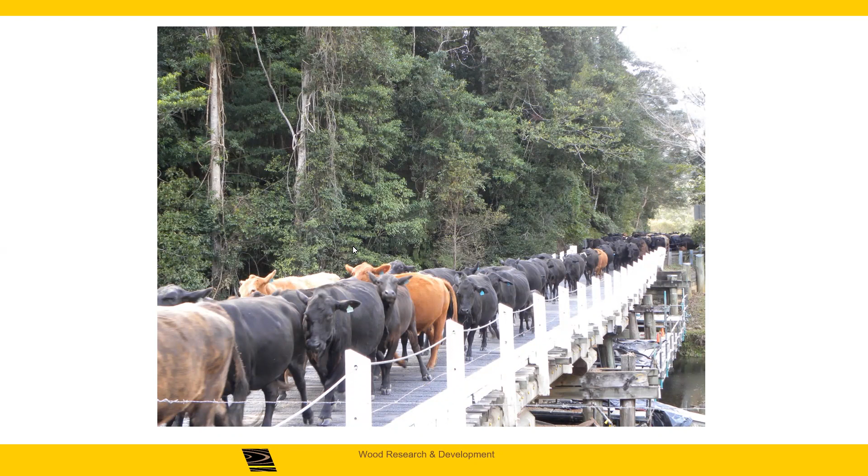Bridges serve for all sorts of crossings, whether it be cattle or horses or cars or trucks, you name it. Our timber bridges carry lots of passengers.

In Calgary, this bridge is dedicated to the elk. They were crossing the Trans-Canada and getting hit, so in this case they built a bridge just for the elk. Getting the first one across was a bit of a problem, but after that they kind of learned, and they use this bridge while the trucks use the one behind it.

This bridge here, I went under many, many times. It's on the Pacific Highway in the eastern part of Australia. I crossed underneath this bridge about 20 or 25 times before I realized the only thing on top of this bridge is a forest—it's trees. This $7.6 million masonry structure was designed and built to allow the koalas to get across the highway without getting hit. Now, they're yet to see the first koala go across, but hey, it's a good thought.

So our bridges, owned by various groups and governments, look for longevity. They want things to last a long time. When you build a bridge, you want it to last a long time.

Last week we talked about longevity and how people presume timber bridges don't last a long time, which is just not the way it is—it's false. We have bridges in New Brunswick, for example, where I am right now, that are over 100 years old, with an average age of timber bridge of 82 years old. That's older than most precast concrete bridges, which arrived on the scene in the 60s for the most part. So when people say timber bridges don't last, that's just not true.

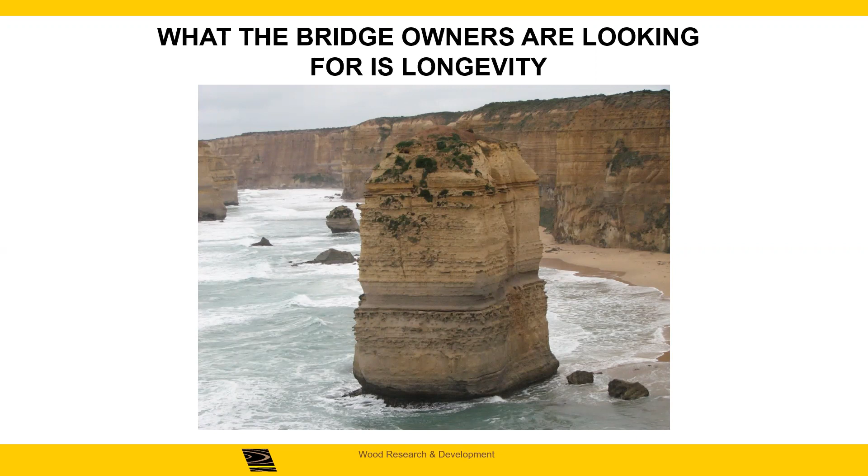What they do is confuse not lasting with maintenance. When poor design characteristics and strategies are practiced, our timber bridges require more maintenance dollars. That's what we're here to talk about today—what can we do with design to improve those aspects of a bridge design.

Forces in our bridges come in many forms: tension, compression, bending, shear, torsion. This is a particular design function for a bridge.

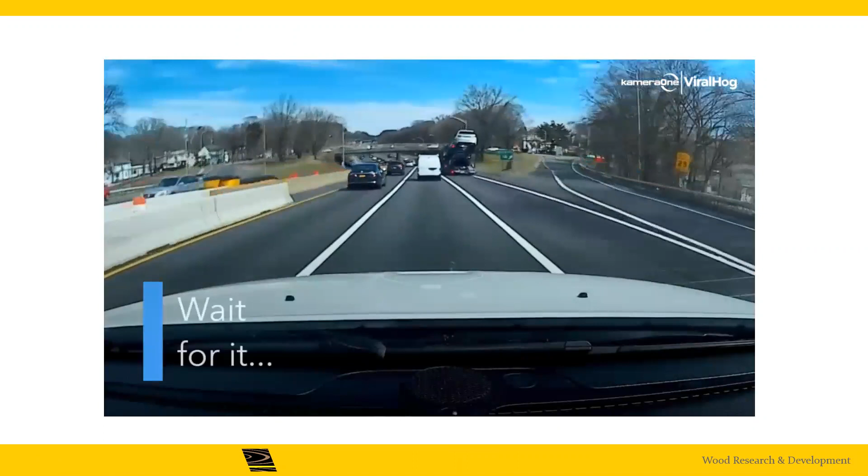You have to think about lateral loads. In this particular case, the truck driver's not really looking at the clearance sign, and bang. So we get lots of different loads that go on our bridges, and they create problems for us as engineers.

This is another one here. You can see the dump's up on this truck. Did that designer count on that load getting into the bridge? Probably not. Loads come in many, many forms.

As you can see, this is not hitting a bridge, but you get the point. When you're working around vehicles, there are lots of impact loads that can go on in our bridges. This is another one here.

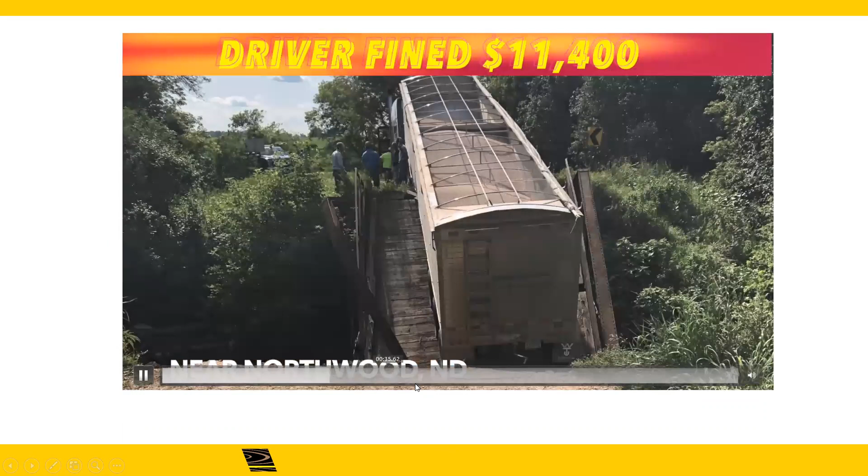Our bridges suffer from the types of things that go on that create problems for us. This old bridge, you can see here, the driver's fined $11,400. He's crossing the bridge overloaded. It's a steel bridge with a wood deck, and it's gone. It's part of the history of the community.

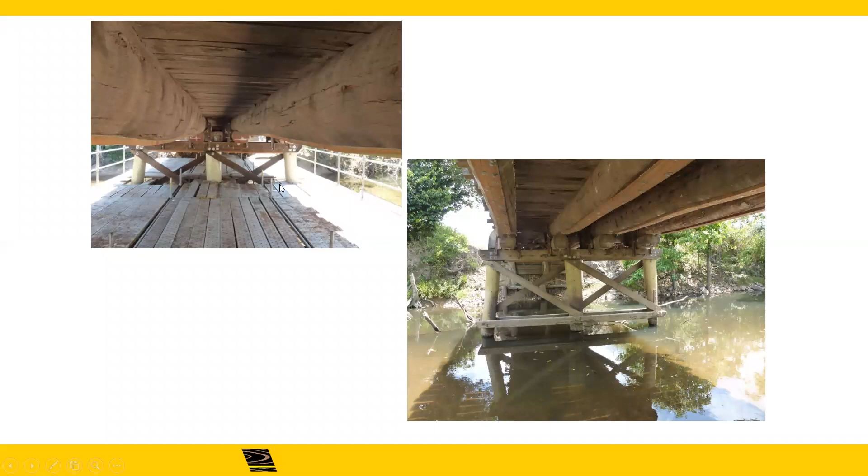So these bridges carry and catch lots of different loads. You can think of this bridge here—it was restored and got fixed up, and just in time, because this is the day it was finished.

Its restoration. This is the day before. This is the day after.

So our loads are quite large, aren't they? When you think of this particular bridge, lots of old timber bridges were built low for a purpose. They didn't want the debris field to catch; they wanted it to go over the bridge. As you can see here, these floods can create debris fields. And then there's other things that happen even to new bridges when we drive piles and the tip of the pile doesn't get bearing, but instead lands in a gas pocket and after a bit settles. The first thing you know, the bridge is unstable and collapsing.

So lots of different types of loads are created by environments, by truck traffic, wind, snow, a host of environmental loads have to be considered along with live loads and dead loads. These loads all create forces in the bridge system.

There's a tension load, where things are pulled apart in tension, or compression, where they're pushed together. Bending moments, where we have a truck tire going across this girder, for example, create a bending load where there's a compression and tension couple created to resist the load, and a reaction force at the end of the girder. These girders and decks carry these loads, and it's in the design of these elements to withstand these loads that we find the issues relating to timber design.

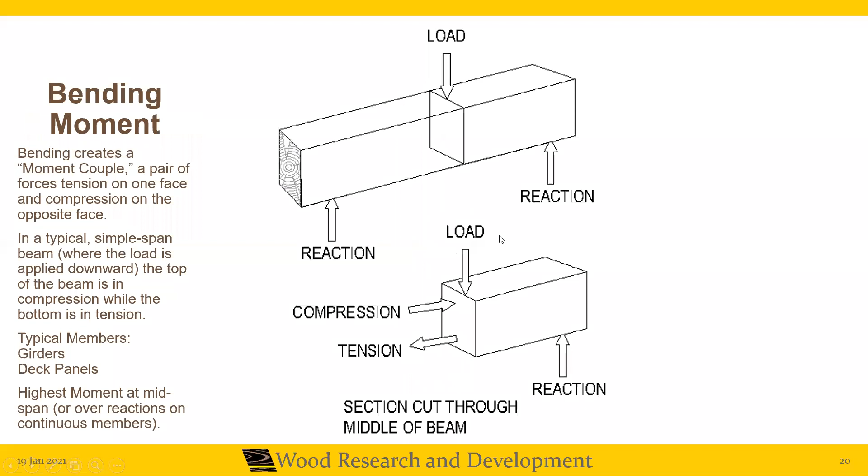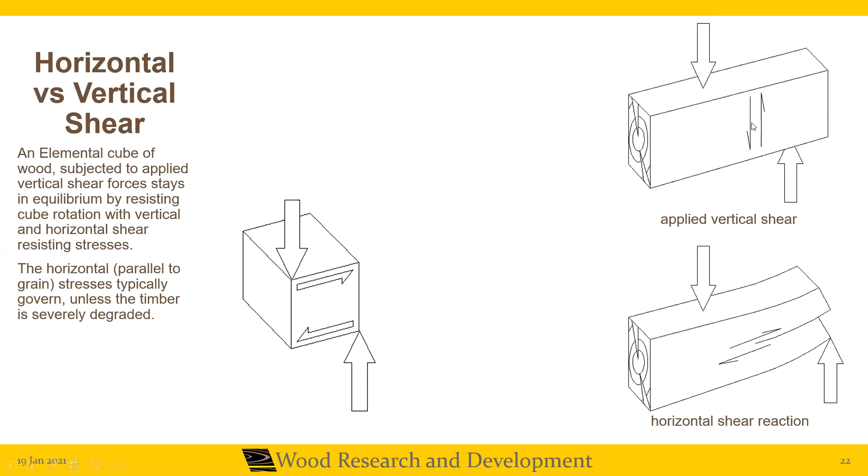But this is not the shear force we consider when we're designing timber, for example. Instead, if you take an element that remains in equilibrium, it's the horizontal shear force created in the beam that governs with timber, not the transverse shear. And if engineers aren't aware of that, problems can develop.

In addition, torsional forces, for example, on piles: if you have a batter pile that's on the outside of your load path, stopping and starting action, acceleration and deceleration loads can create torsion from the cap on the outside batter pile. That torsion then translates to tension perpendicular to grain along a microfibril angle you see here, and voila, the pile splits in tension perpendicular to grain as a result of torsion, and we have to go in with a new support.

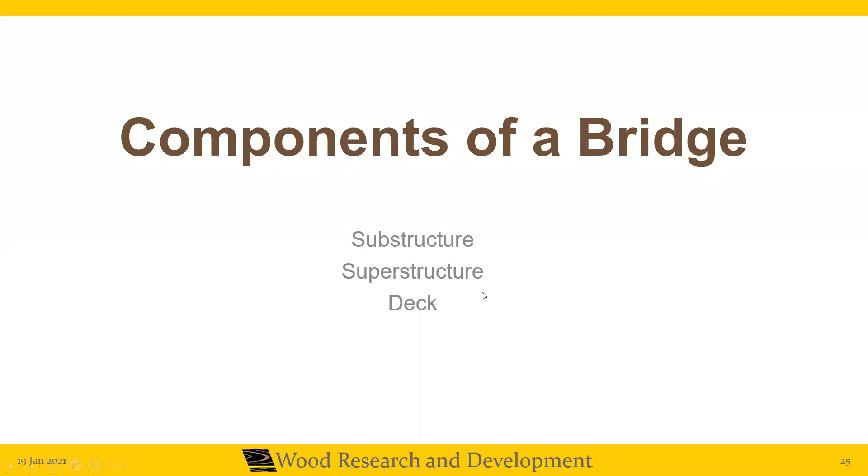So these types of forces create the need for proper design of components in a timber bridge: the substructure, superstructure, and deck. The substructure is the part of the bridge structure that carries the load into the foundation system, into the ground, and that's a very important part. In a typical bridge up to, say, 30 meters clear span, the substructure can be 40 to 60 percent of the cost, getting the loads into the soils at the riverbank or the end of the gap we're spanning.

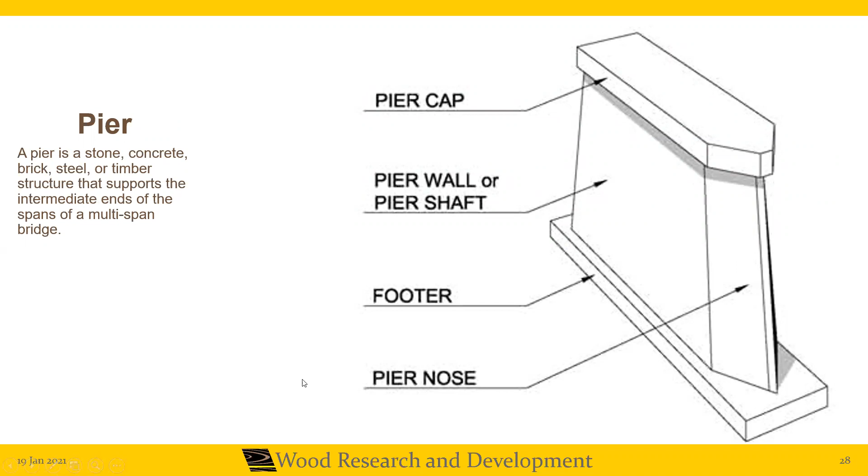Oftentimes I'll hear engineers say, well, if it's decayed here at the ground line, we better go and dig the piles out. And you'll see engineers pulling all the timber piles out of the abutments or piers to get clean of them, suggesting they're decayed or rotten. But the fact of the matter is that below oxygen, the piles are as good as the day they were driven, and there's nothing better to provide sill piles than bright top stubs from the existing piles that were driven.

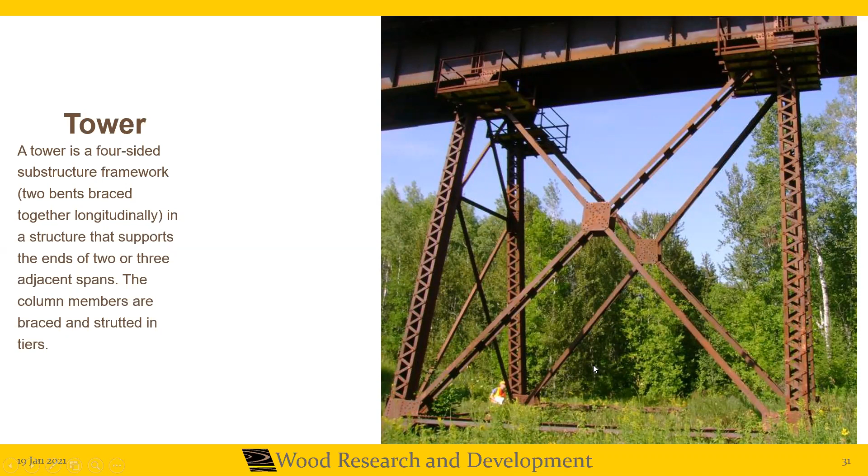Superstructure, the next part of a bridge in our systems, can come in many forms. We can have girder-under superstructures, using round log, squared-up log, or dimension timbers forming a girder-under system, like this one here.

Today in girder-under systems in our timber bridges, we often find problems where engineers tried to increase the capacity of the superstructure for higher loads. When this bridge was first designed, it was for 12 tons. As loads increased over time, engineers added more girders. When they did, they took the loads off the tops of the piles and put them between the piles, without increasing the strength of the cap.

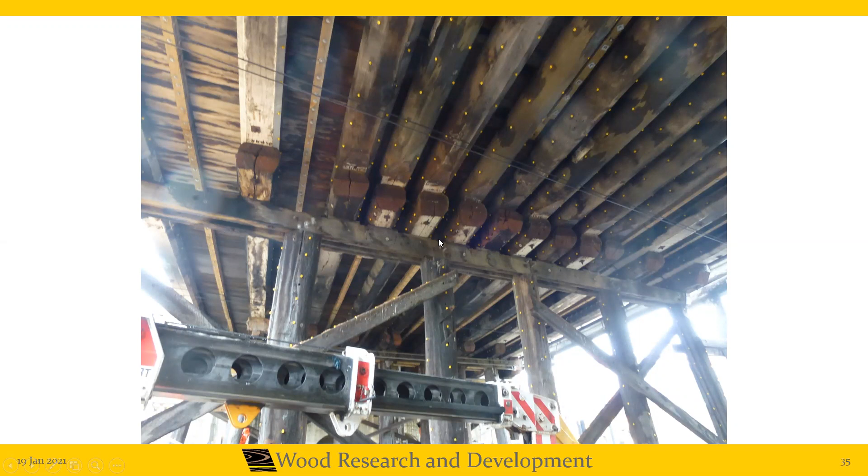The cap span, or split cap span, effectively increased because the girders are dropped in the middle instead of just at the pile tops. So caution is needed in timber bridges to watch for shear effects in these caps.

Another form of substructure under our girder is a framed bent. This bent looks like it was framed on top of a series of mudsill piles, when in fact it wasn't—it was framed on top of a 4-foot sub pile that went down to a pile block 4 feet under the frost line in Ontario.

So don't just assume, because of what you're seeing, that the design involves mudsill piles or a framed old pile bent—many frame bents were themselves built on sub piles that only went down below the frost line, as seen in many overpass bridges and rail lines built the same way across Canada.

You see the superstructure here involves girders that were, in a sense, cantilevered off the end of this last bent on each side of the track, where clearance issues or risk assessments by the major railways lead to the need for adequate clearance.

There's a height envelope and a width envelope that the train needs, particularly for double stacks—for example, we look to have 23 feet from the track surface, the top of the crown of the track, to the soffit height of this drop-in.

So what do they do? They design a cantilever girder system where the drop-ins allow the freedom to shallow up on the beam and take advantage of this mechanical opportunity.

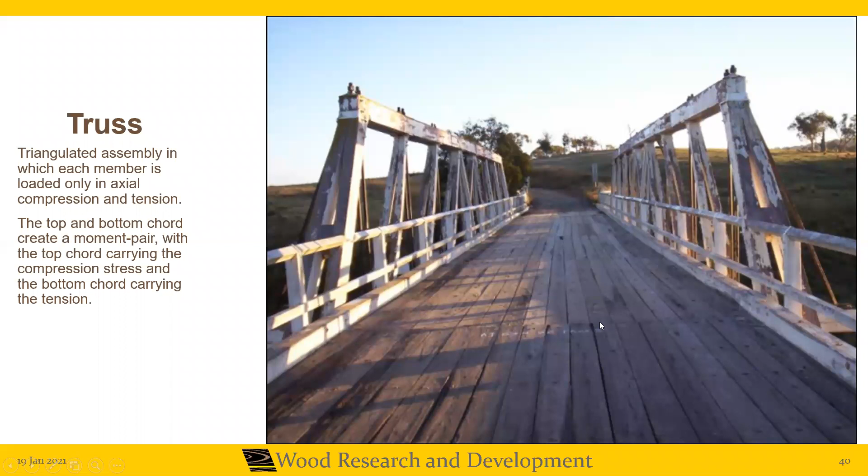This Dare truss was a Percy Allen truss, with the compression webs and cross web in the middle—a hallmark of a Percy Allen bridge—with the tension chord swapped out for an MC channel, called a Dare bridge. Or a through bridge here in Fundy National Park, which was rebuilt after a fire.

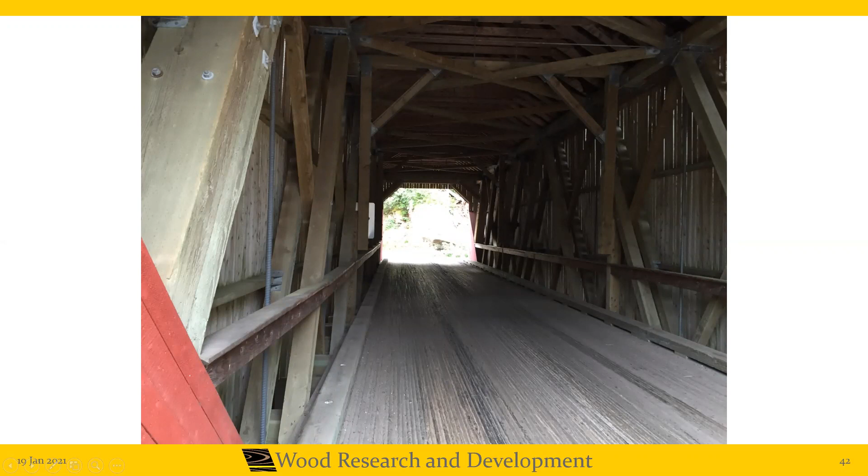This Howe truss, a typical Howe truss—many of the trusses for our covered bridges in New Brunswick are Howe trusses. You see this truss in British Columbia, as I mentioned last week, with the bent metal holding moisture.

Oftentimes the worst thing you can do is put bent metal on the face of wood. You think you're protecting it from the environment, but every day the metal sweats due to temperature change. If there's no gap created between the metal and the wood, decay can be accelerated. This Howe truss is a deck-under bridge, 156 feet long.

It's in the CNR's system out at Dawson Creek. You can see here, these are big trusses, and these were restored, as I showed you last week.

This arch, again, down in Amherst, is another form of superstructure that carries load a long distance. And the engineers of old—what did they know about these arches and trusses?

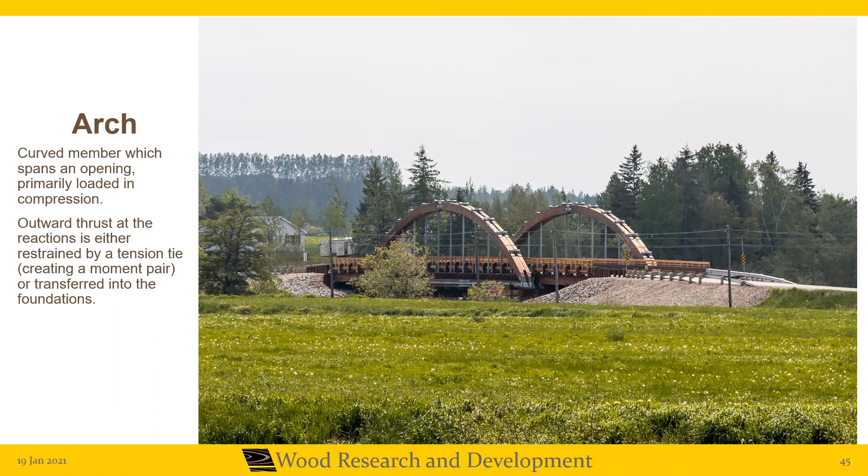They knew that if they separated the compression chord from the tension chord by a big lever arm, that gave them the ability to span longer distances with greater loads with less material. The whole idea of a truss is to get that mechanical advantage of separating the tension and compression chord by a big moment arm, to give you the leverage, the resisting moment couple you need to get the big load across the bridge and go a further span.

You can see this old fellow here, nearly 50 years old, down in South Dakota, as I talked about last week, the Keystone Wye Bridge. It's an interstate exchange, a very famous bridge. They wanted to take it out and put new ones in for $23 million. When we finished inspecting the bridge, we could only find a few elements that were bad, and they're going to restore these bridges this summer for $3 million. That's a $20 million saving to extend the life of this bridge series.

Decks are transverse decks. You see here this transverse glulam deck going across on the girder underneath, very typical. The panels lay on their side, and for engineers wondering about design, I've always chosen L2, all L2 design. That gives you the happy medium between coarse grain and fine grain. If you get too coarse, chasing treatment uptake, then they crack and splinter. If you get too fine, the treatment uptake suffers. So a good happy medium on the design for these transverse deck panels, with an all L2 mix for getting maximum uptake in terms of weight.

In pentachlorophenol, for example, the target would be 9 kilograms per cubic meter. In terms of depth of penetration, you'd look for side grain penetration for incising of 5/8 of an inch deep, and then a penetration of around 7/8 of an inch.

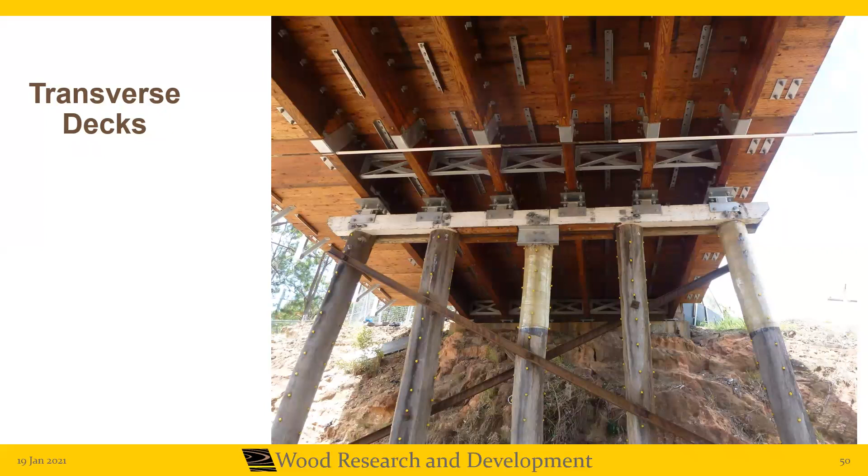People often see incising on these bridges in their design spec, and they think that incising involves injecting somehow the treatment into the wood. That's just a fallacy. What does incising do? There are incising specifications, and in incising, what we do is open up end grain. End grain travel of liquids and moisture in wood is 100 times faster than side grain. All an incision does is use a roller with slotted teeth, and the piece rolls through this roller, and the tooth creates an impression into the wood, opening up the end grain. That's what incising does to improve uptake and depth of penetration.

You can see another example of a transverse deck panel system here, and yet another one. In these deck systems, you'll notice that gauge beams are very important. The gauge beams help prevent the difference in deflection that occurs, which leads to reflective cracking in any asphalt. People often talk about using dowel systems to join the panels, but I've never been a fan of those, because the loaded edge distance of the dowel always creates a breakout problem. It's best to use a gauge beam system.

As you can see here, another deck system is a longitudinal deck system, where these are solid elements that have rods positioned full width of the bridge, and they're tensioned with the required torque. In this particular case, it was 560 foot-pounds, and it pulls these together so the deck and the superstructure act as one.

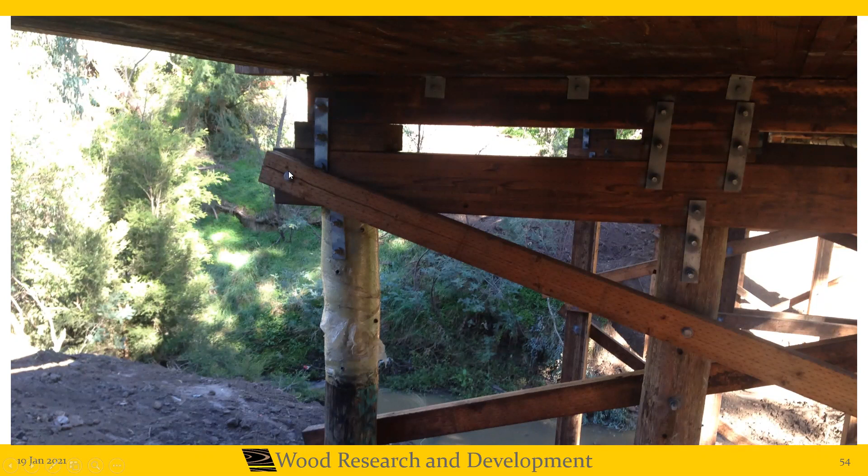Underneath the deck and superstructure, here's another substructure option, and you can see something I showed last week but didn't address because it wasn't relevant to the design side. You can see this crack here going on. What's causing this crack? What is it that's getting to it? We're going to talk about that in just a minute, so keep that in mind. You can see this deck system here over the arch system underneath, and our columns all form part of that superstructure deck system that carries our load.

So as we dive into the design properties now, what are the important things I look to? Well, firstly, how do we design timber bridges? I always tell engineers to go to the local country or jurisdiction, look for the bridge code, and within that there'll be a timber section. That timber section serves as a code to stand between the designer and the timber code. In Canada, we have O86, Engineering Design in Wood. What S6 Part 9 does is interpret O86 for the engineer, on how to use the timber code to build timber highway bridges.

The treatment code talks about what we do to preserve timbers with preservatives and pressure treating. Timber design guides, like the Canadian Wood Council guide, help engineers design correctly. Owner specifications and standard drawings are all part of the package important for engineers today to design with timber. This specification side is a lost art because there just aren't many timber bridges designed anymore.

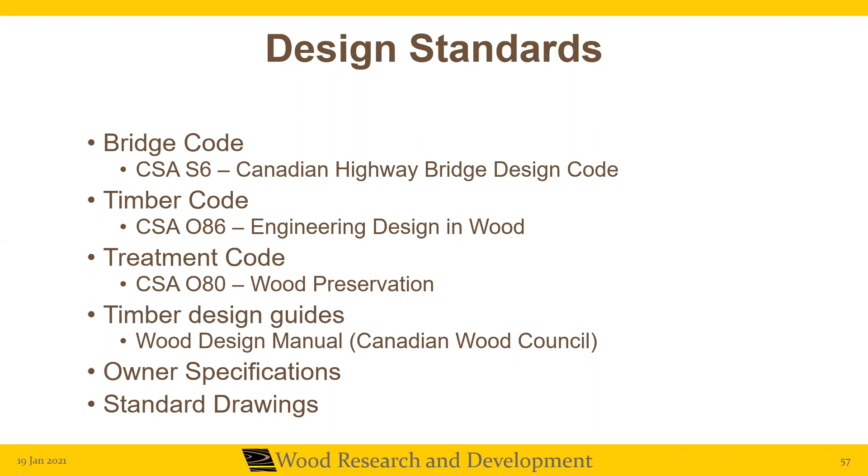Steel and concrete have taken the market. As a result, just this last decade we've seen timber bridges come back into vogue because of carbon trading, cost, and a whole series of reasons we talked about last week. So part of this resurgence or renaissance of timber bridges is remembering the proper specifications, which we'll talk about here coming up.

And lumber grading — what does lumber grading mean? Well, engineers design timber bridges and put specifications on drawings, then they go out to tender and contractors bid them. What provides the liaison between the designer and the contractor? It's the lumber grading rules, because the engineer specifies what type of grade and species to use in a particular application. Then the contractor can go to suppliers who use the same lumber grading rules to grade their timbers, and the two meet together properly.

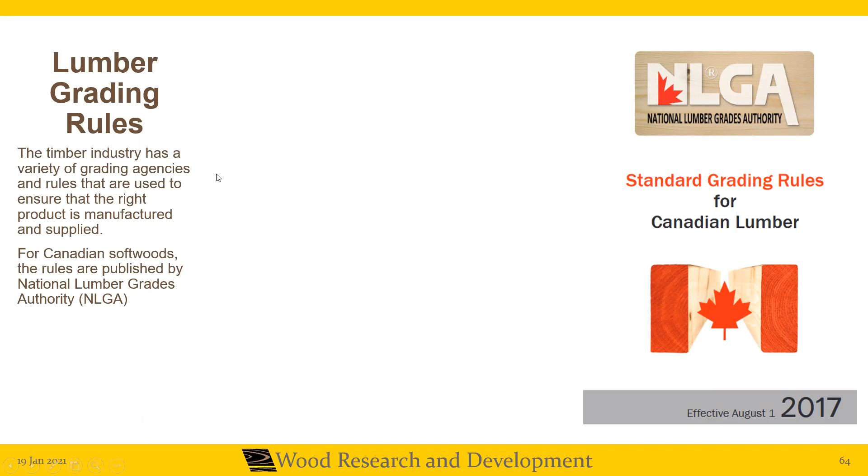You couldn't have the engineer design a number 2 SPF girder to go on a bridge and the contractor not know what number 2 meant. So the lumber grading rules, NLGA, define these things for the suppliers of materials, and they allow the engineer to have, in a sense, a meeting of the minds.

There's a variety of properties important with timber that impact how we design with it that engineers need to know about. Number one is that wood is anisotropic — it has different strengths in different directions. It's different from steel, which is isotropic with similar properties in all directions. One of the worst things you can do is design timber as if it were steel.

The next part is that wood is hygroscopic, meaning it breathes in and out moisture. It's constantly equilibrating with its surroundings. It's why your wooden rockers get loose in the winter. When you've got a wooden rocker and in January you're heating air coming in from outdoors that's cold, when you heat it, it can hold more moisture. When it picks up moisture, it sucks it out of the timber furniture, and the furniture shrinks and gets loose.

A bridge is no different. The average moisture content under an open deck bridge is 16%, under a closed deck bridge is 14%, and under a covered bridge it can be less than that. So wood is hygroscopic — it breathes in and out moisture, and when it does, it can shrink and expand.

Further, because wood is hygroscopic, when we're buying large dimension timber like 8x16s or 12x24s for timber bridges, they're typically green. That means when you buy them, they're over fiber saturation point and full swell. When they dry out to the moisture content of the bridge, they're going to shrink. If engineers don't realize that and consider it, it can cause trouble in their connector designs.

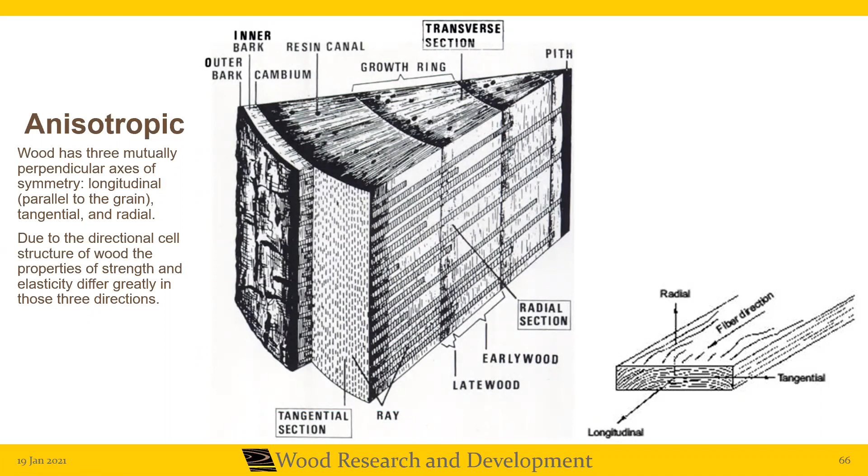This moisture content can affect physical properties in addition to dimension. Moisture content, for example, is described as a percent based on the weight of the structure, and wood can be 180% moisture content.

It's like a sponge on your sink side that goes dry. When you let it fill up with water, it can be 5 times the weight of the dry sponge. Well, some wood can have 180% moisture, more moisture in terms of weight than the wood itself.

Wood, as it shrinks and expands, is picking up and dropping off water. Generally, as it goes down below fiber saturation point and gets below 29% MC, it tends to gain in strength and gain in modulus of elasticity. Moisture affects shrinkage and swelling, as well as stiffness, toughness, and fracture morphology. So there are a lot of things that moisture impacts in wood in addition to MOE and strength.

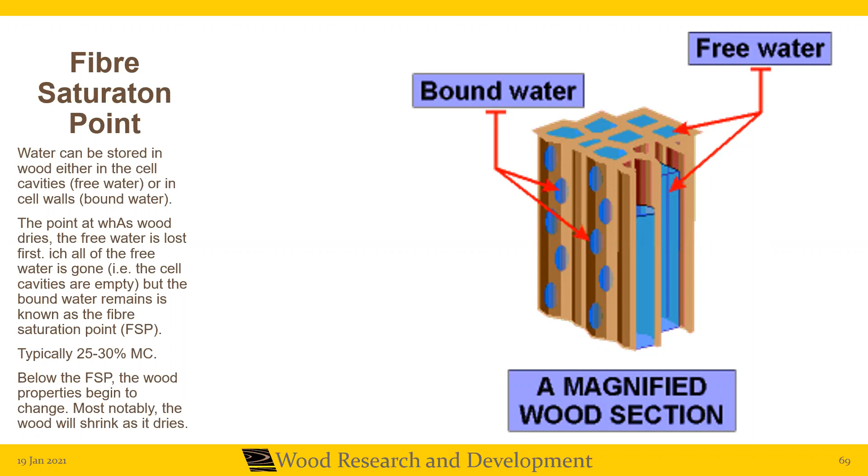Fiber saturation point is the point at which the cell water, the free water, leaves, and bound water held in the cells begins dropping off the wood. The free water leaves first — that's cell lumen water. When it's all gone, the next water to leave is the cell wall water, and when that leaves, wood shrinks, gains some strength, gains some stiffness. As it drops below 22% water content, it becomes independent of decay, because below 22% wood does not decay. So water is very important in wood, and it's a very important part of any designer's criteria for designing their wood structure.

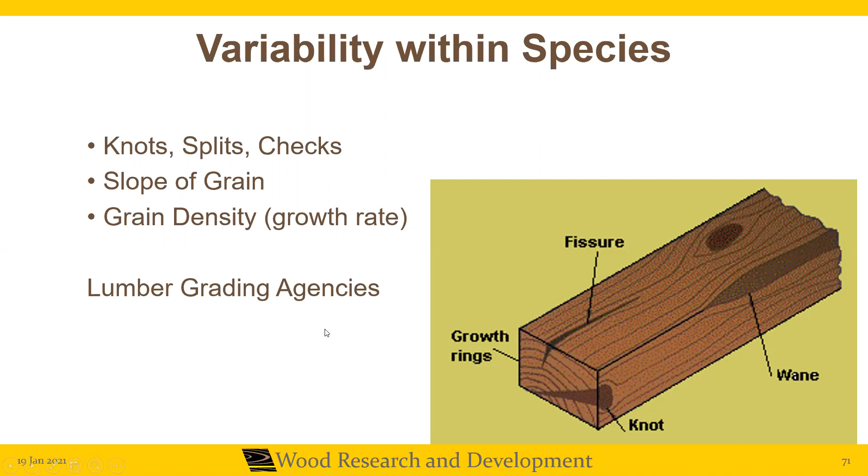Variability within the species can also be a factor — knots, splits, checks, slope of grain, grain density. These are things watched by lumber grading agencies, and they will determine the grades of our timber, such as the size and location of knots.

In addition, there are differences between hardwoods and softwoods. If you have a maple corbel, for example, it's different than a softwood corbel. Hardwoods grow in response to light — they're phototropic — so slope of grain tends to be a bigger problem with hardwoods than softwoods.

Softwoods, on the other hand, are geotropic — they grow in response to gravity. That's why if you go skiing on a ski hill, you'll see the softwood trees growing straight up and down, while the phototropic hardwoods grow all over the place searching for light. Our softwoods have generally been used for building materials more because, one, you can drive a nail in it — it's not so dense that you can't — and two, its slope of grain is generally better, and slope of grain impacts the strength and bending of species a great deal.

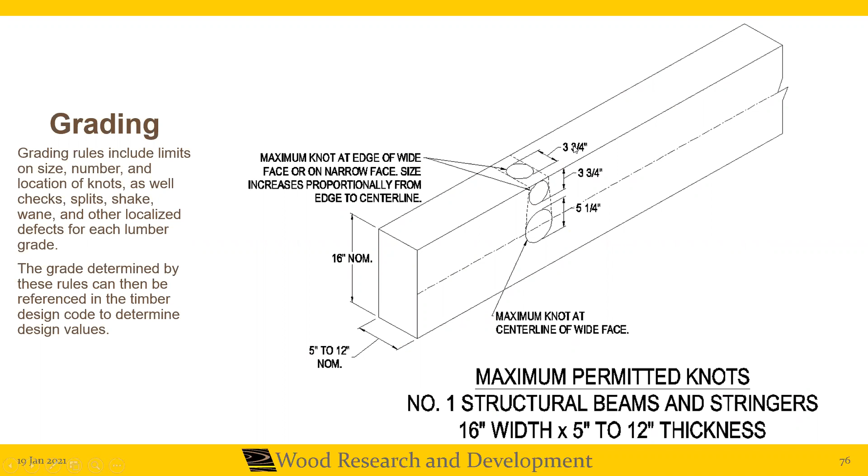Temperature, although not a big factor in timber, matters in that when you reach over 150 degrees C, it will start to lose some strength — not really a designer's criteria. At low temperature, if you're using green wood, it can freeze the cell lumen water and lead to breaks and shattering. This is particularly typical in the Great Canadian North.

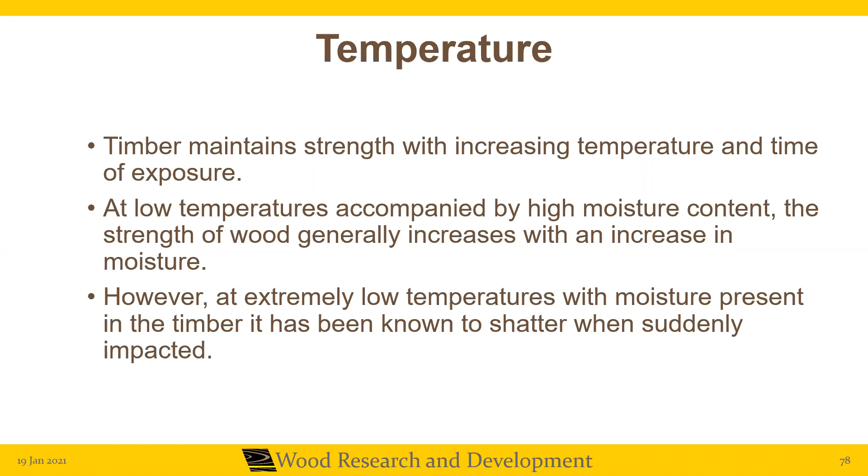Specific gravity, or better known as density, is a unitless number — the ratio of the density of wood to the density of water. We see specific gravity, SG, used around the world because you don't have to know the units. We often think of specific gravity of wood in terms of moisture content: its highest being 0 MC, then air dry at 12, service dry at 19, and then FSP, or fiber saturation point, green.

People often think of the term kiln dried — they say, well, I'm going to buy kiln dried wood. What does kiln dried mean? Service dry kiln drying is 19%. Why did they pick 19? It was a comfortable range below 22% so that black spot and spores don't form. That was the reason for 19.

In glue laminated beams, for example, they're produced at 12 to 15% moisture content. That was chosen for two reasons: to help cure the waterborne glues, and secondly, to be in the mid-range between 0 and FSP, so there's minimal dimensional change.

In fact, a glue lam beam is perfect for bridges because it goes into service at about the same moisture content as it's going to finish and equilibrate at, unless you make the mistake of using a waterborne treatment, which I do not recommend in glue lam, because that takes a dry glue lam and turns it into a wet one and changes the way we treat it for design.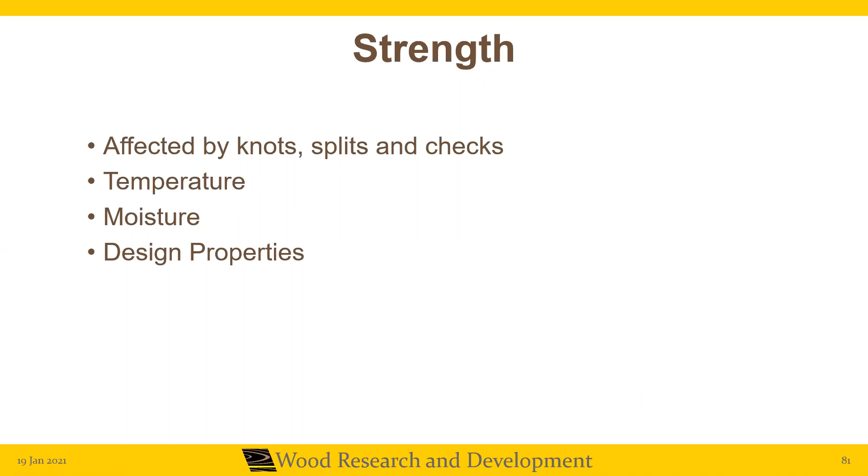Strength is impacted, as I said before, by knots, splits, checks, temperature, moisture - design properties are all impacted by these features. Bending, for example, in wood is impacted by knots. And you can think of it here.

You look at this load head putting a load on this piece where the knot, even though it's in the compression face, is still going to lead to premature failure. Why? Because in this particular case, the big knots are at the top, and you can see it here.

And the big knots create slope of grain. That slope of grain then creates tension-perpendicular-to-grain problems, as you can see here - this beam, this heavy dimension timber, is installed upside down.

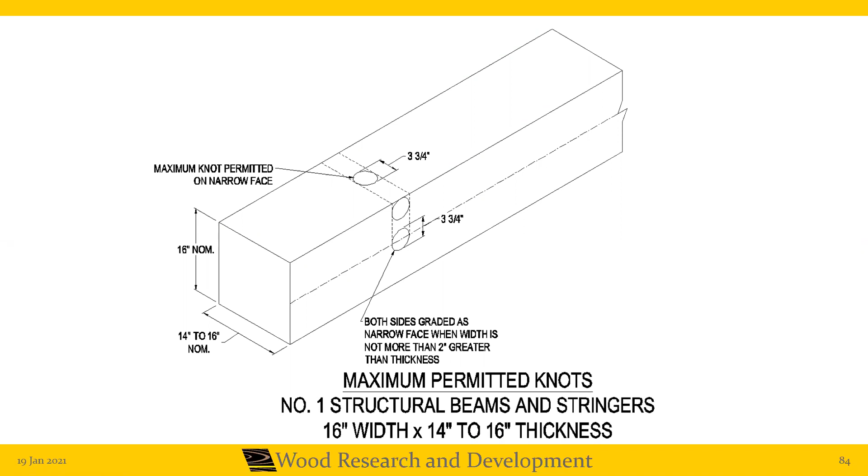Now, I was never taught at UNB, in my undergraduate nor my master's, that there was an 'upside down' for a large dimension solid sawn timber, but there is, because the grade rules allow a bigger knot upstairs. And the bigger knots, if they get turned downstairs, are going to create problems, as you can see in this girder right here, which is installed upside down.

So the knot itself isn't the weakness, because it's generally denser material - it's where there was a branch. What creates the weakness is the slope of grain around that knot. It's the slope of grain that's the problem.

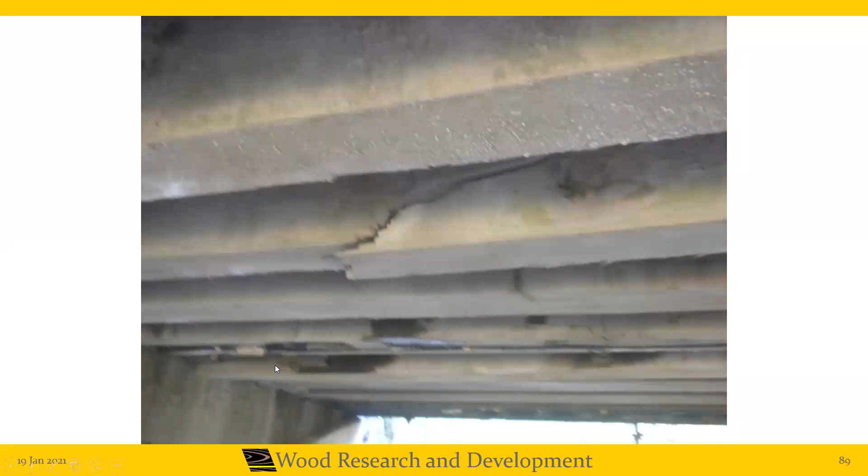You can see these examples of slope of grain failure in girders, a situation where the designer might have specified a number 2, for example, and the supplier got the right wood, but then it got installed upside down. And you can see what goes on.

And the reason that a knot creates a problem is this. Again, contrary to popular thought, it isn't the knot - it's the slope of grain around the knot.

And if you take and resolve the forces in tension to perpendicular-to-grain and parallel-to-grain, it's the resolution of those forces that gets you. Wood's weakest direction of strength is tension perpendicular to grain. In Doug fir, for example, that's 15 psi, or about 0.1 MPa.

So if I have a big knot and it causes a divergent grain, the grain has a greater angle to the axis of the piece, and the resolution of the forces creates more tension perpendicular to grain. These failures you're seeing right here are not caused by tension parallel to grain.

They're not caused by failure in the knot, because you rarely see the knots fail. It's the area around the knot, where there's been a resolution to tension perp, that creates the failure. That's one of the big things about wood being anisotropic.

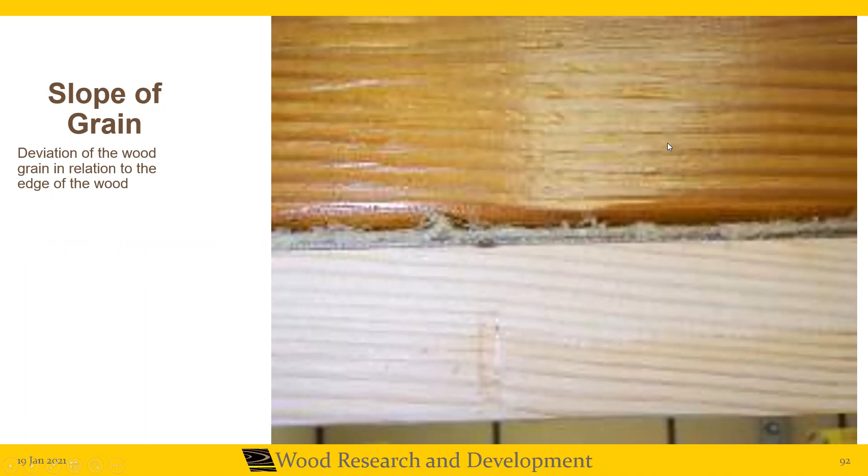We like straight grain wood, as you can see here, where the grain's pretty well aligned with the axis of the wood. Now, this tension perp also shows up in other ways.

The girders are designed to provide lateral stability for the caps and piles at abutments. And these knee braces that are common in the prairies are not a good design. They're a poor design - a hand-me-down from years past.

They used drift pins all the way down through here, which lead to decay. The pile then loses its shoulder strength around the drift pin, and they start to bow inward, because nothing's keeping this abutment pile bent from bowing inward toward the river.

So what do they do? They put a knee brace in here and notch it to cover the pile and the cap, and then tension perp takes over, and voila, you've got trouble, as you can see in this picture. Just a poor design - it should not be used.

The way to handle this is don't put the drift pin at all. Use a proper horizontal bolting system to attach the girder to the cap, turn 90 and have a horizontal through this cap, a horizontal through here, then here, do the same with an angle bracket, horizontal and horizontal, turn 90. That allows the system to stay in place.

When you go vertical from the top with a fastener, you shorten the life of the connector by two-thirds. That one simple change in your design, stopping the use of verticals that originate from the top, will increase the longevity of your bridge by three-fold. It's that big one right there that takes out most bridges.

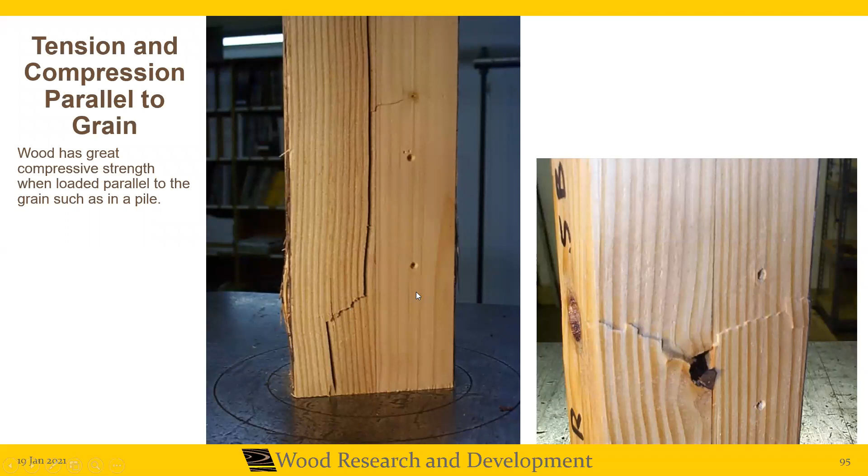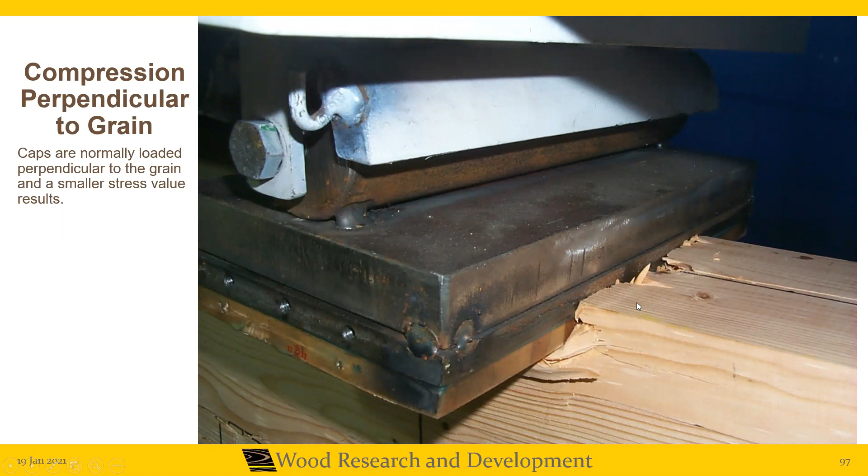You see this perp to grain failure from this load head where the wood is crushing perpendicular to grain. This is a bending failure under a load head for a round log girder. And this guy here is shear parallel to grain.

This is shear. 66% of all horizontal shear failures in wood occur at the late wood, early wood interface. That's when the wood starts growing in the spring, the cell walls are thinnest, the lumens are biggest, and its shear capacity is lowest. That's where they'll be, that's where they'll focus, as you can see here.

This is a shear failure in a beam. This is another shear failure in a beam. And there, oh, that's a shear failure.

Now people say, did that shear failure originate at the reaction? Well, these beams go by the support, as you can see here. And so shear is up in the upper quadrant and over where there's continuity over a reaction.

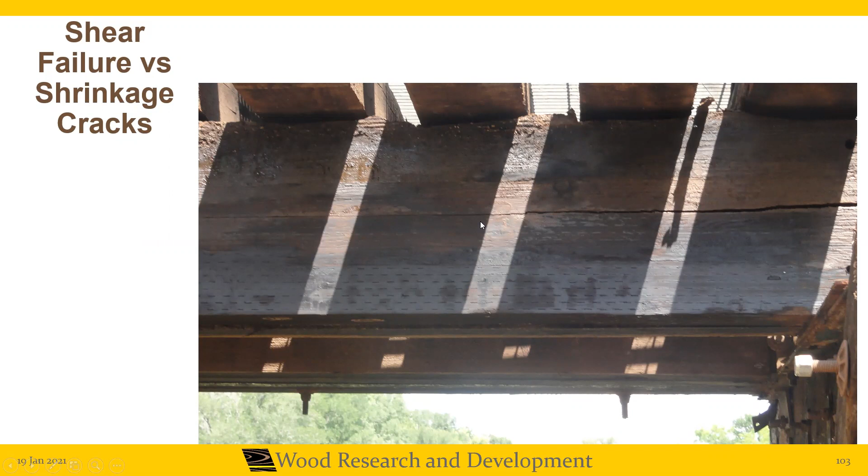Here you can see shear failure again with the sawdust at the bottom. Why is it sawdust? Because the two pieces of wood are rubbing together. You often get shear failure in caps where you have pumpers. You can see a pumping pile creates a gap. We'll talk about that in a bit.

They're measuring them here, a 16th, a 3/16th, and so on gap. When that happens, your shear span increases and caps can go to failure like this one here.

And so in the industry, what did they do? They thought, well, we'll get around this horizontal shear failure in caps, we'll make them out of precast concrete. There was a big move back in the 90s to do that. They're now taking them out of the code for the railway, for example. Why? Because they're so stiff that they move all the load out to the batter piles, and a 15-degree angle on a batter pile reduces a timber pile's capacity by 50%. And so they all take the cracking and failing as we move that load out, because we put a precast concrete cap in there to prevent pumper action creating shear failures.

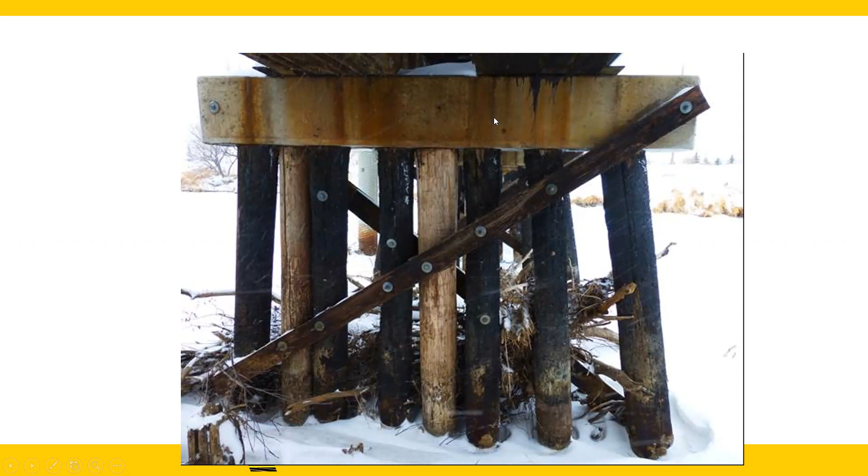You can see here, there's a shear failure. There's a shear failure. Is this a shear failure? No, it isn't. If you're out inspecting the bridge, engineers or inspectors, and you call this shear failure, you've done a disservice to the client.

What is this? Well, that's tangential shrinkage. There's a boxed-in heart likely inside that cross section, and it gets thin there in the radial direction, and the tangential is double the radial. And what does it do? It finds a fault line.

And what is that fault line? That's a ray, that goes to the center of the tree, and as it shrinks, it separates at the ray, and that's a naturally occurring shrinkage crack already accounted for in the design values. And if you say that's a shear crack and discount the strength of your element, that's a big disservice to your client.

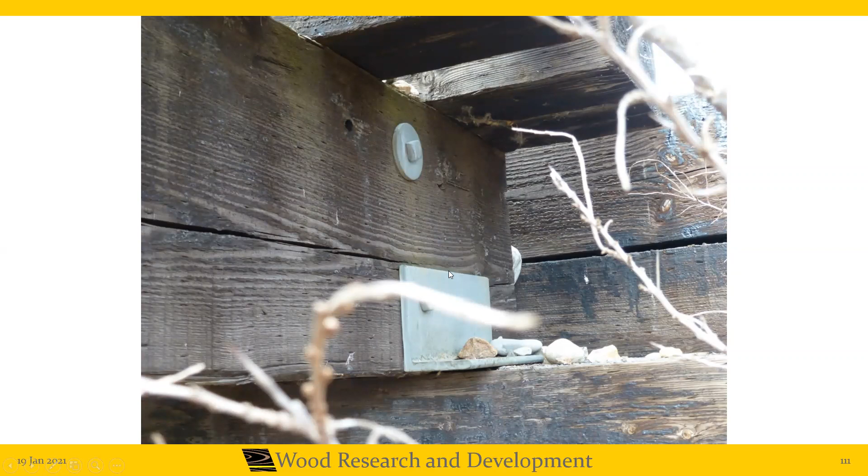You can see another one here, not horizontal shear failure, that's shrinkage. I had these sent to me to test one time at the lab. I put my credit card in there. I called the client back and said, look, I can test them for you to see if they're defective, but I know they're not right now. That's a normally occurring shear crack, shrinkage crack, and we do not need to test this piece.

All wood develops shrinkage cracks. You can see this freshly cut piece here. Why does it shrink? Well, tangential shrinkage is double radial, and it finds fault lines along the rays and opens up as it shrinks. And it doesn't shrink until it starts to lose cell wall water or bound water.

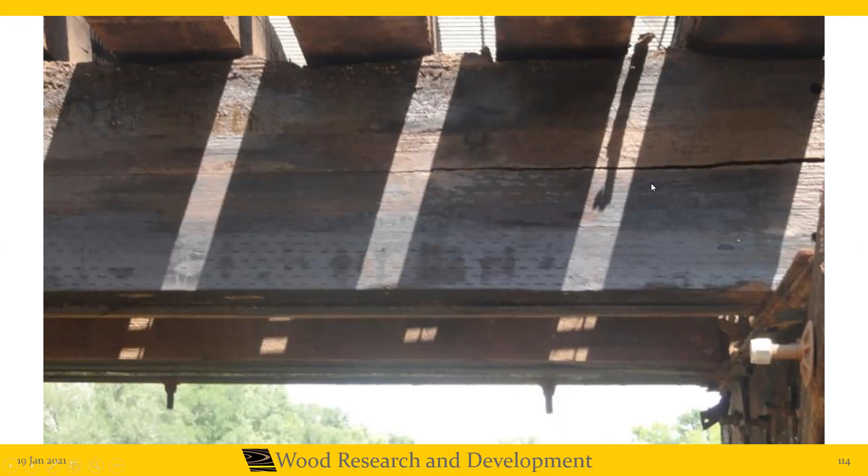Here's another shear crack. I want to show you this drawing. I wish I'd have seen this picture when I was in my undergraduate program. This is a big coal train going across Crescent Beach Bridge out near Vancouver. And you can see here what's going on. This continuity wasn't considered in this interleaved girder system.

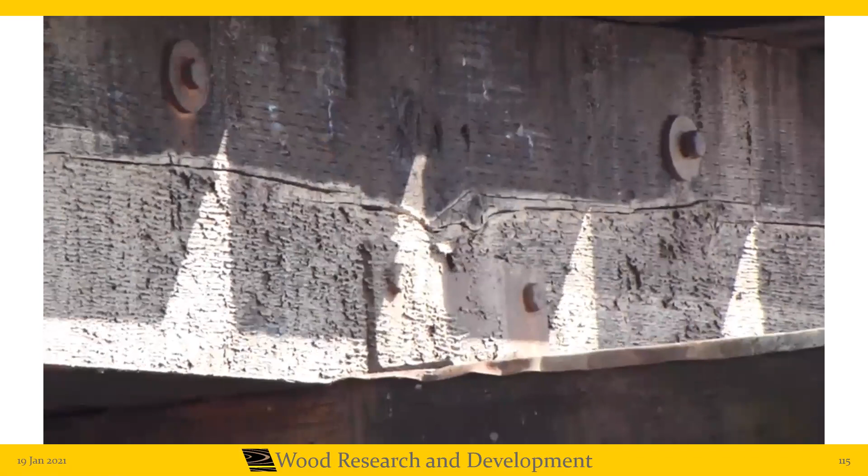There's 4 plies. Every other ply is continuous and one simple. And they didn't consider shear. As a result, shear led to failure in the one that was picking up the heaviest load. Who was he? The continuous element. When he fails, the outside ones go too.

And what is that white? That's wood powder that's being rubbed up and will oftentimes lead to fires, because if you have a unit train with a lot of action, this horizontal shear will rub and create heat, and those wood fibers can catch on fire.

And what do they do to try and fix them? They'll put what they call a sister girder piece across, which does nothing to deal with the situation. It actually covers up the crack. And what does it really do? It jacks all the track spikes up, as you can see here. There's another one here - a very common way. We'll talk about this more on the maintenance side next week.

So this shear distribution at reactions is a pretty important feature. Engineers are taught to use 3V/2A and neglect shear a distance D away from the support. Well, if you're using glulam continuous, you can use our shear volume now, and it's over 2 cubic meters. So what do we see in simple spans and solid sawn? We see a lack of understanding about where shear is a maximum. Shear does not reach parabolic about the neutral axis, and 3V/2A, which is the transformation of VQ over IT, doesn't reach it until you get to about 2D.

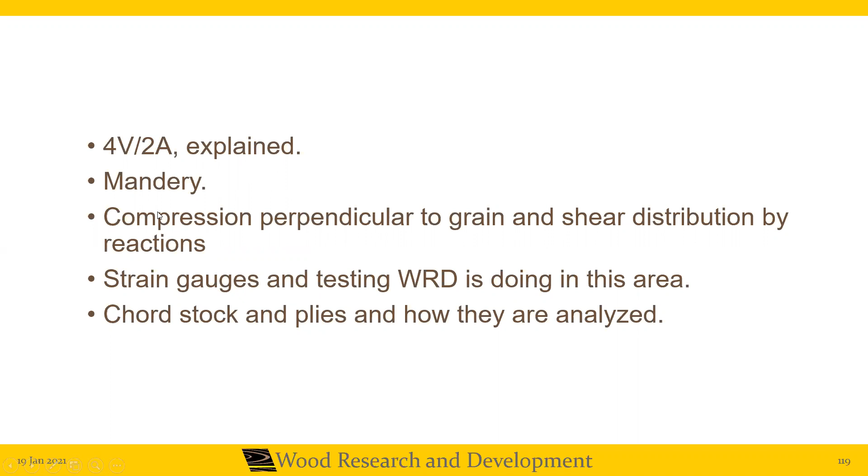In this range here at the end of the reaction, it's parabolic - it's triangular, 4V/2A, and the compression bulb that's here increases the shear capacity, which is why we see the neglecting of shear. But the maximum shear is really close to the bottom at the reaction in a simple span. This 4V/2A was explained by Mandery, as you can see here is the reference to this. And he realized in 1969 through a series of tests that wood's horizontal shear capacity is up to 50% increased when it's associated with compression perpendicular. Thus why we neglect shear distance D away from support.

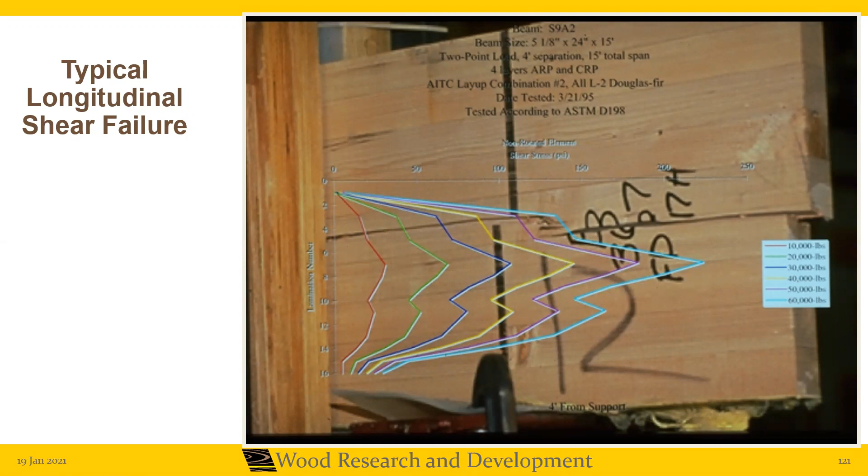But shear is truly there about 2D away. And if you see horizontal shear in a simple beam at this height, you'll know it's occurred usually more than 2D away, and then runs to the ends. In the Canadian system, we recognized this in our cantilever beams where there was no load on the cantilever, but yet it was failing in shear. The shear had its origins in where the load was, and it runs to the end, as you can see here.

So now moving into timber connection design. Horizontal connections are the way to go. Vertical fasteners that allow moisture to follow the trace of the connector to the inside of the wood accelerate decay. In addition to that, I always specify pre-machining post-treatment.

The idea of treating timber and then drilling a bunch of holes in it on site just makes no sense to me at all. It's why my specs and designs always call for oil-based preservatives so that I don't swell the wood, because I can't pre-machine and post-treat with water-based preservatives - that swells the wood and my machining won't stay. So I always specify oil-based treatments that fix to the cell wall, and I always specify pre-machining before I machine my fasteners out in my design of kits.

You can see here in a typical bridge - look, this is a typical design series. You'll see that all over the place. It's why 82% of all bridge degradation is due to decay.

Why is it? Because over the years, 100 years ago, what did we do? We drove verticals. Everywhere was easy to drive from the top. We just drove verticals, drift pins, look at them all. And if you look for decay today in existing timber bridges, where do you find it? Where the fasteners were, where the ambient water gets down the trace, hangs around a long time, and leads to decay, even in creosote-treated piles.

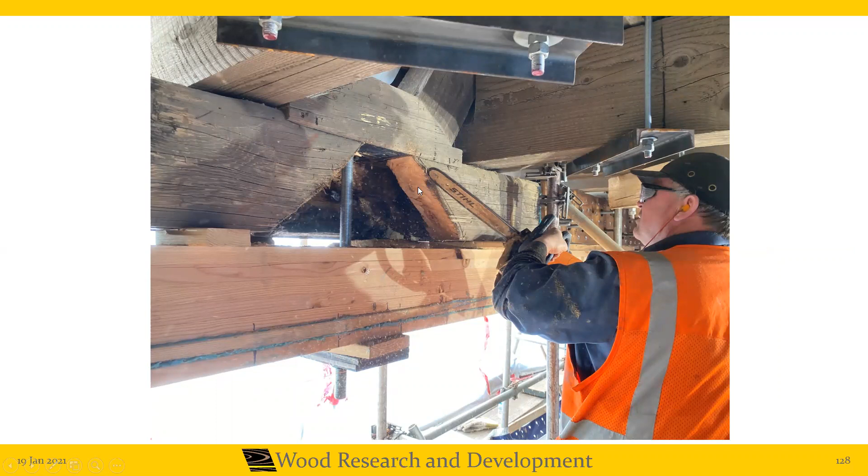It was one of my most complex designs of a connector I had. We have tension forces in this parent pair. We have a node block here with a single compression web coming down here. It's the king rod at the end of the span. So we've got tension in here, a king rod, a node block, a marriage block inside, and all this action going on. And here comes decay. The moisture following down this vertical, getting in the middle here, decaying from the inside out.

We had to design a connector that would basically allow us to take both of these parents and amputate this piece as the first chord, and we'll do the same to the second chord at the same location. So we transitioned with a Parallam, a high strength fiber piece here, and you can see we're doing in a bevel block. There's a bevel block, you can see it here. We're gluing it into place. Now we're going to put a tension splice cover plate on it. That's going on just as we speak in these days, and this will happen on both chords, allowing us to restore the tension capacity, the bearing capacity, the shear capacity. There were 9 different design bases for this connector.

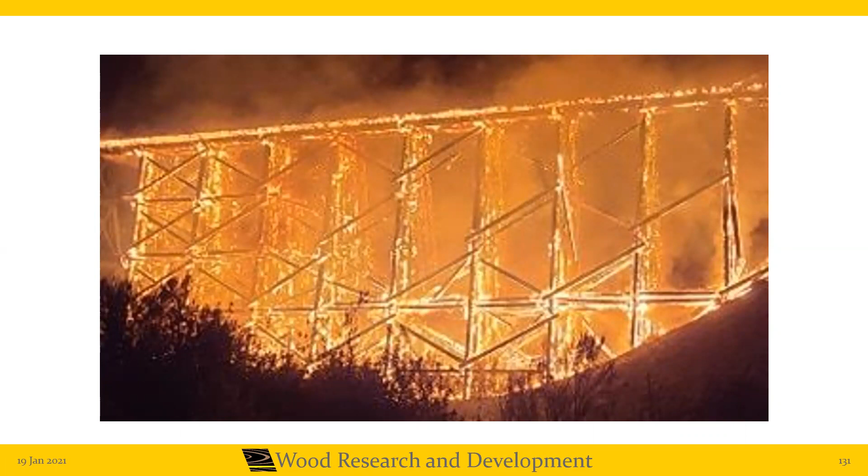Secondly, you've got these fasteners that are going through the wood. They conduct thermal energy to the center of the wood where the decay is. And so that combination leads to bushfires to take down timber bridges. And so by controlling in our design, the way we design and using the proper fastener systems, we protect the bridge against fire more, we extend its life against decay more, and we build a stronger, more solid bridge.

So we allow for shrinkage in our timber as well. If you're putting green timbers, which is any heavy dimension timber that you buy in Canada, 8 by 12 or 12 by 16 or 12 by 24, these timber elements are going to be green, even if they're creosote treated. You can't use creosote in New Brunswick and Nova Scotia, but even if there are in other areas, they're still going to be over FSP and they're still going to shrink as they equilibrate.

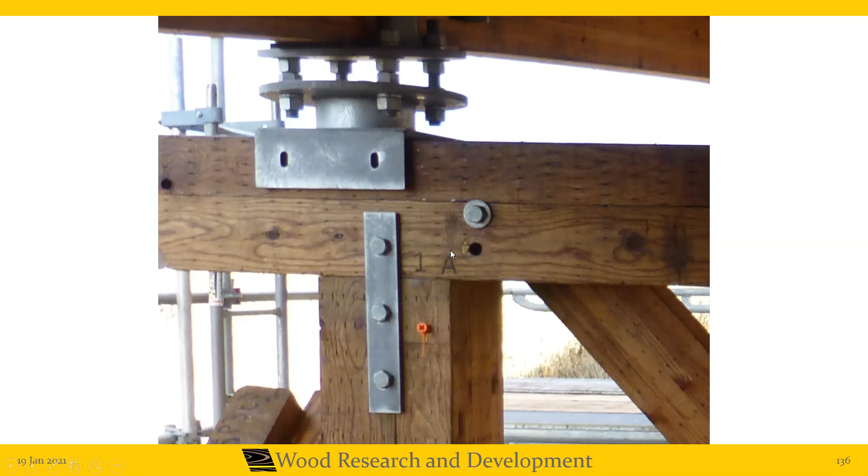So what we do is we make our connections with ovals. Everything, our side plates all have ovals. What does that do? It allows the wood to shrink and settle on itself as it dries out and equilibrates with its surroundings. Everything needs to have slots like this so that the deck can shrink back and forth. You can see here, we have adjustments here for letting the deck move. And here you see horizontal with adjustments. You can see this guy here, I put him in on purpose to show this adjustment in this cheek on this lift bucket that allows the girders to be lifted up and down. And this I thought you'd catch - this is called shelf cutting the wrong material.

You never shelf cut a glue lam, especially a treated one. And you can see here it was done wrong. I put it in on purpose. Why wouldn't I shelf cut this?

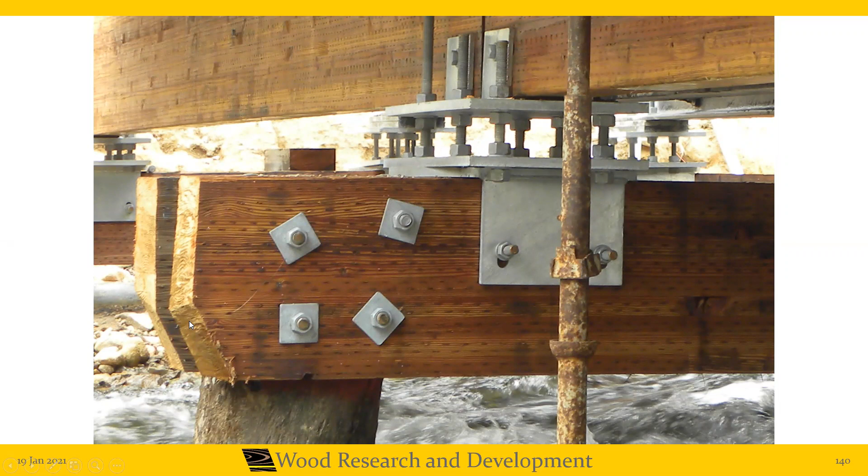Well, you shelf cut hardwoods and solids to cause the drip edge to occur in the heartwood, giving more stability against decay on your end piece. But there's no sense doing that in a glue lam beam because that's just not the way it's built. In this particular case, you can see these pieces are shelf cut, and the corbels here, they're shelf cut too.

And then we have a copper naphthenate treatment with 2% reactive agent and an anchor seal to prevent that's paraffin wax and water. You can see these adjustments, slope cutting, let the water run off, let the wood shrink and expand. These were all converted by going 90 degrees with ovals, all the verticals were pulled out of this bridge and it was swapped out for a horizontal system.

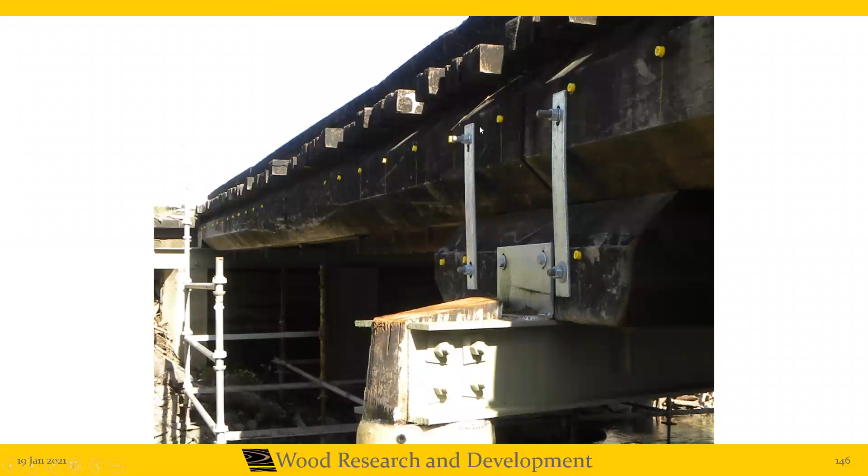You can see here, and there's the diffuser, we'll talk about next week for maintenance issues. You see the slope, the slotted attachment here. These are slotted so that this gauge beam can move with the deck. Attachments here so that they can be tightened instead of using these old track plates. You can see tie plates here. So fastener spacing, end distance, edge distance, and so on, has often been a big feature.

I was on the Northridge Earthquake Post-Disaster Analysis Committee for Technical Activity Committee at AITC back in the early 90s. One of the things we learned there was that the glue lam beams didn't fail. They failed at supports because the shake and bake brought in acceleration loads and there was a plug pull out. These trusses and these elements would pull out, and thus brought in this whole discussion about shear plugging, which you'll see in the codes and standards today that apply to both shear plates, split rings, and bolt shanks.

And so our end distances, both loaded and unloaded, edge distance, both loaded and unloaded, and our spacings are all geometries that have been established that allow engineers to help prevent shear plugging and maximize capacity without problems.

And people often ask me, Dan, what about pilot holes? The hole to hole, the shank diameter to hole diameter is a critical feature in a fastener. Engineers should spec the tight tolerance. The Canadian code calls for 1 millimeter or 2 millimeters max. The way to calculate it for different diameters of bolt shanks is 0.92 - you should have a bolt diameter that is greater than 0.92 of the pilot hole diameter. The design code values we use today are based on 0.92 or higher.

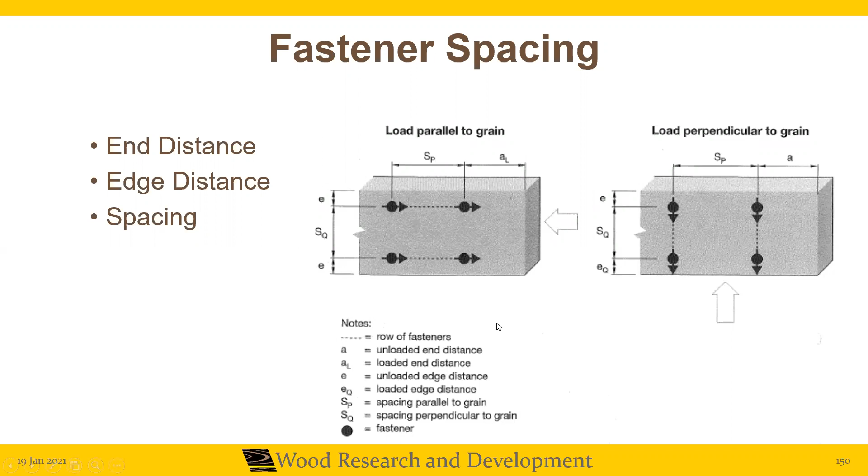They let water into the untreated core. They're often built with CCA treated pieces. It's water-based, it leaches back out into the river. The drift pin lets the moisture into the bright wood, and the rest is history.

And thus why people say you don't build with timber anymore, because things don't last and the maintenance costs are so high. But if we designed it correctly to last, carry loads, and go the distance, people wouldn't say that, because timber bridges would be lasting longer than steel and concrete.

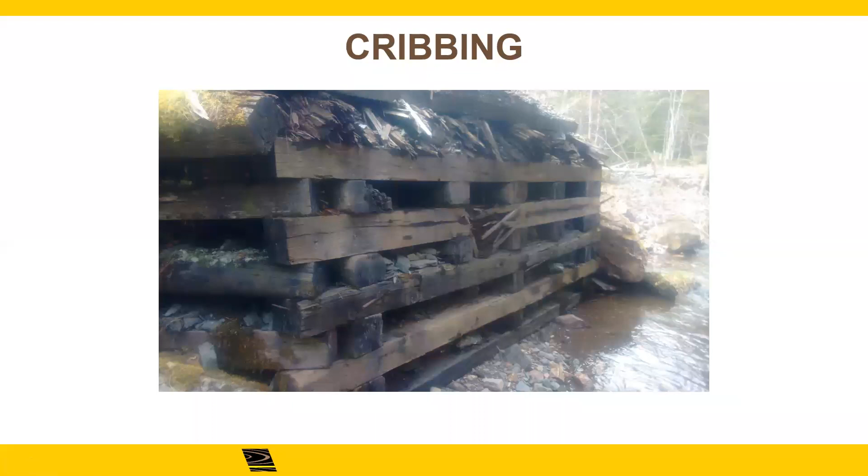You can see the first impact of a drift pin. Decay gets in behind the treatment. It loses compression perpendicular. A 10% loss in specific gravity due to decay leads to an 80% loss in compression perp, and we get what's called a compression bulge. That's the beginning of the end for your cribbing, and you can see it going on here.

What happens to the cribbing? Well, in this particular bridge in Nova Scotia, the whole bridge settled down, and we get a bump here on the asphalt above. So we don't like it.

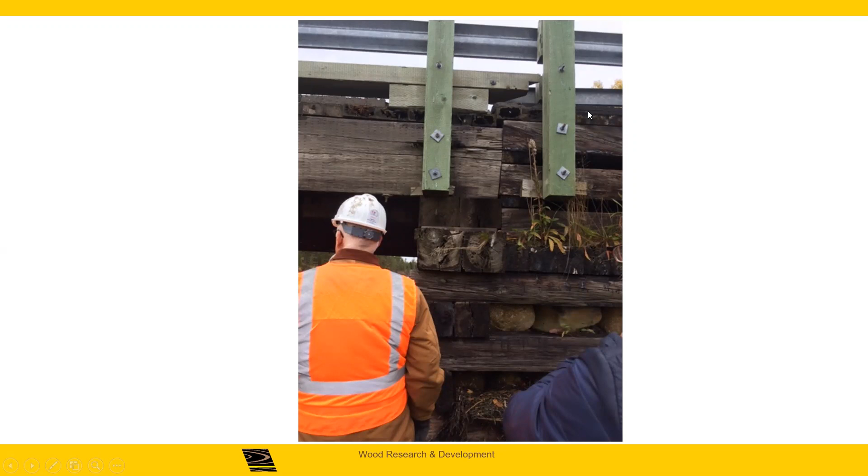Open face cribbing is only good to hold the big aggregate. The small isn't held, and we like to see a closed face because it holds the approaches better, because the fines are what is the glue that holds your aggregate base together.

So this is the typical design that I would recommend to use instead of drift pins. They're easy, they're cheap. You can use 6 mil plate thickness, bent with a welded cheek up top, and put them all horizontal. Cribbing designed with these materials will last 3 times longer. It might not be as cheap as driving a drift pin, but is it worth getting 3 times the life out of your cribbing? I guess so.

So timber pile design is another one that you don't see a lot of work on today, because timber piles haven't been driven much in the last couple of decades. But that doesn't mean there aren't a lot of timber piles in service today, because there are. In our timber pile design, we usually consider 2 features: tip bearing and side friction.

There are about 6 different formulation methods in the world today, of which we use 2 or 3 predominantly to establish the pile capacity. We combine the tip bearing and side friction together with geo to analyze our pile capacity. Typically, a timber pile with a big end top of 12, small end 6 to 8, driven 30 to 40 feet, is good for 25 tons. They can be good for 40, but typically I'll estimate the pile capacity at 25 tons.

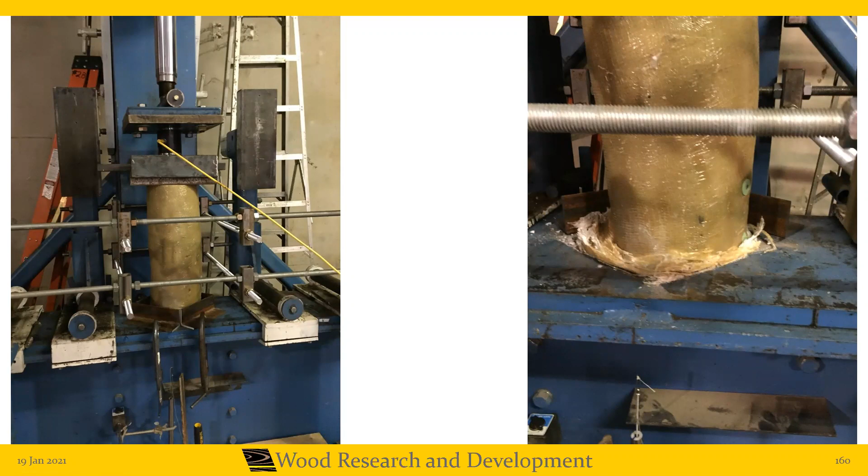For those out there thinking about using dynamic pile testing with timber, it's not really an accurate way to test timber because of localized compression failure at the tops of these piles, which have been impacted by vertical drift bending and decay. If you take a pile and do an axial test on a piece of it, its capacity will give you way more than 25 tons. It's not just the pile capacity, it's the soil capacity, it's the geo report that combines with the timber pile to give you the capacity.

Why? Because someone went along the riverbank and did a bore sounding, drilling a hole in these piles, and established the thickness of the annulus incorrectly, calculated capacity of the piles, and voila, the first heavy load across the bridge didn't make it because the precast concrete superstructure they installed tapped all the capacity out of the piles. So understanding pile capacity, both from a geo and from an actual pile capacity standpoint, is pretty important.

Now, lateral and longitudinal bracing are important aspects of piles. When you get tall, rangy ones, we like to have lateral stability in both directions. As long as you get your lower girt up out of the flow so the debris fields don't catch it, this is a good game. Lots of times you just can't put them longitudinally because of the river flow.

People ask me all the time, what determines where that sash is going to go and how many X's we're going to have both longitudinally and laterally? The answer to that story is about the effective length, the degree of incline, and plumb pile. Each of these piles will calculate out different capacities, and there's a handy guide—people can get at me if you want, I'll give you a couple—but AREMA has, in chapter 7, a really good pile load distribution chart for taking off the pile load distribution based on plumb all the way out to batter.

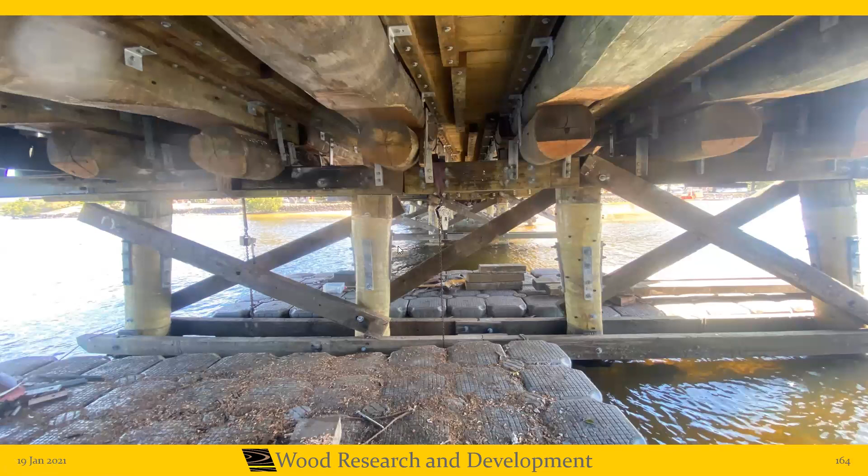Like an old fella getting older, I walk a little more feebly all the time. What happens when you get old? You walk with a cane. What's a cane do? Changes the effective length. Well, what happens with a timber bridge? The older it gets, a little more weak-kneed, what do you do? You put more bracing. So lots of times if I'm restoring old timber bridges, I'll put 3 X's. You can see in the background, there's 3 X's. This one in the foreground needs another brace, but you can see the 3.

Now, people ask me all the time, what about grids, Dan? What do you think about grids? Well, I don't mind grids that go between the brace and the pile. The bolt goes through the center of it, and the grid creates an anti-rotation. But I'm not really keen on them if that grid system is going to puncture the treatment. And secondly, it's always good to remember that in most cases, lateral braces only work in tension. Remember that, only work in tension. They don't really work in compression. They'll buckle.

So it's about the tension side that gives you the rack resistance in a pile. What's rack resistance? It's keeping within square to give you lateral stability for nosing loads. When you're going across the bridge, the truck driver is moving his steering wheel left and right. That's creating lateral loads through nosing loads. Trains hunt back and forth between rail, that's a nosing load. For example, in the rail, they just use a number. They assume 1/16 of the live load is nosing, and each bent has to have a 25,000-pound load laterally applied to the bent cap top as a way of establishing capacity.

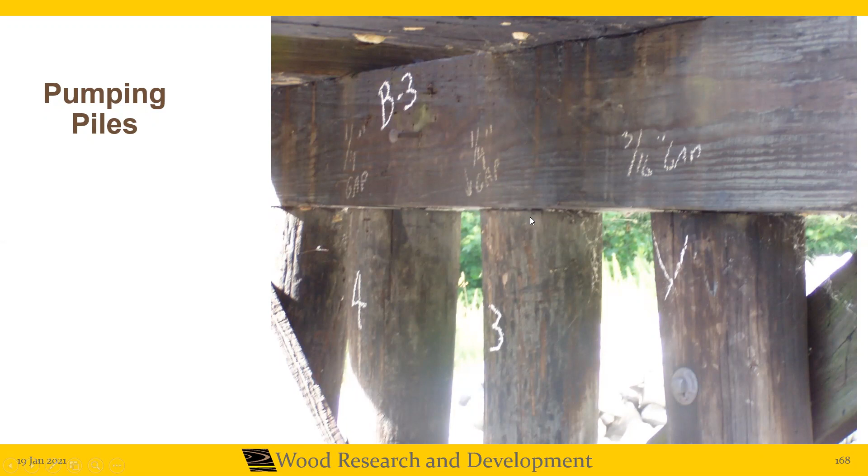So back to the pumping piles, I said I'd return to it. As you can see here, they're measuring the pumping pile. You could put an accelerometer on here too if you wanted to measure what the pumpers were doing. But one of the things we should know as an engineer, never spec a shim for a pumping pile. The last thing you do to this is shim it. Engineers in the room, I'm going to say it again: do not shim a pumper. What does a shim do? It just drives it deeper. And this is shimming on steroids, none of it working.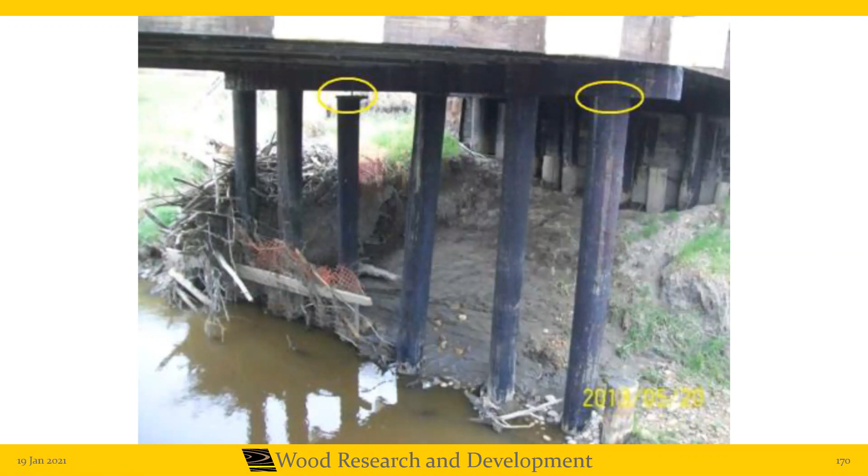Look at this in BC in the Peace River area. You can see it here. Look at the circles. Shim them, they fall out, they get lost, they put new ones in, it just drives it deeper. If you want to solve a pumper, cut it at the ground line, reuse it as a posting pile, and create bearing and increase capacity through bearing. Frame the bent, sill the bent. There's a lot of different ways to fix it, but one of them isn't shimming because it doesn't work, as you can see here. Shimming just doesn't work.

So, timber girder design. Oftentimes with timber, we think deflection is driving the equation. On the highway side, we're governed by L400 on live load. We camber out dead load, typically 2 times dead load. We'll camber it out, we just handle live. As you can see here in this big long pair of beams that went into the Milkish Bridge to lift it up, we put FEMs and put 35-meter clear span beams in there, rolled them in on tracks, and then blocked them up.

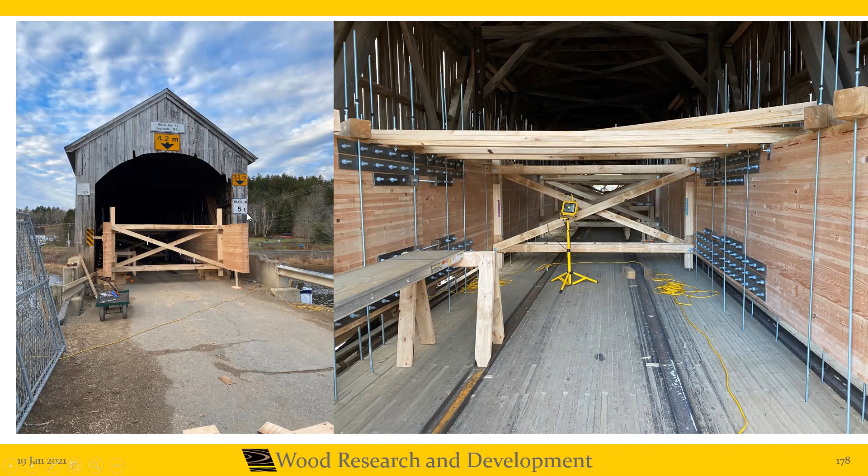We used vertical rods down through the deck and nuts, and basically lifted this whole bridge with two girders, 35 meters long. I had control of these beams, and I know an unreinforced beam fails at L90 to L120, while a reinforced beam fails at about L20 to L30. So I let them take almost 12 inches of camber out of these beams and go flat, pulling this bridge up to a camber of 87 millimeters on a string line. This bridge was literally lifted in the air by beams light enough to roll onto the bridge with its existing 5-ton capacity. That's the trick right there. You can see how flat they are.

So deflection does govern. We watch for deflection in our beams, and next to it becomes the moment resistance. One, serviceability - that's the service of the beam, a rate of deflection for a given load. The other is the strength limits, the ultimate limits, where we have proper composite adjustment factors between ultimate and design.

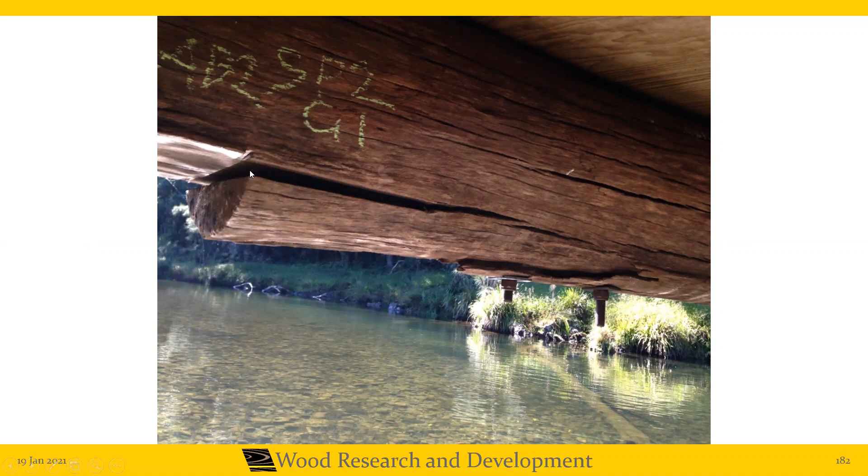Now, talking about these designs for girders, oftentimes we see notches. I hope none of you folks do it after you see this presentation. But we see notches all the time with no slope of grain. Abrupt differential stiffness leads to tension forces perpendicular to grain, the weakest direction in wood we talked about earlier, and voila, we get this reentrant corner cracking. Look at it. Everywhere you see engineers doing it, don't do it.

Let's see if we can make this one play here. I don't know if I can see.

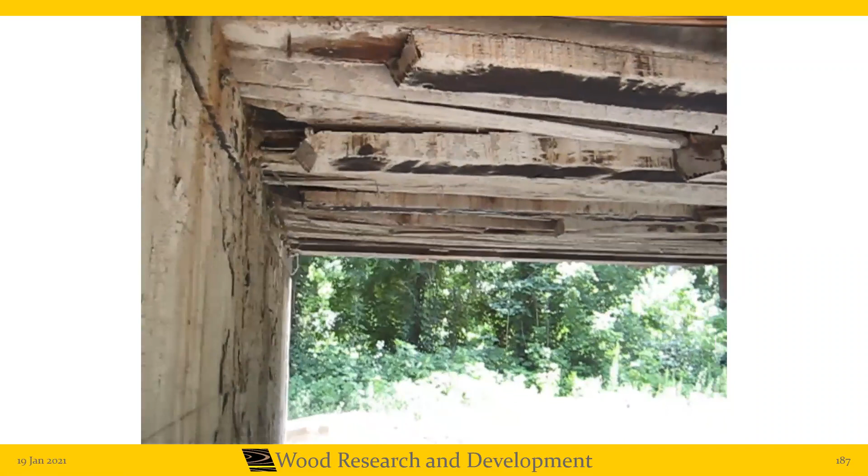I want to tell you a story about this particular bridge. It has 13 stringers in it. There's a train going across it. I'm underneath it - I don't feel like I want to be underneath it. You can see all of these notches were in these because 11 of the 13 girders had been replaced in the last 3 years. Thus why people don't want to use wood. And they thought they could solve it by moving the notch further out to the center, and nary a time did anybody think about slope cutting.

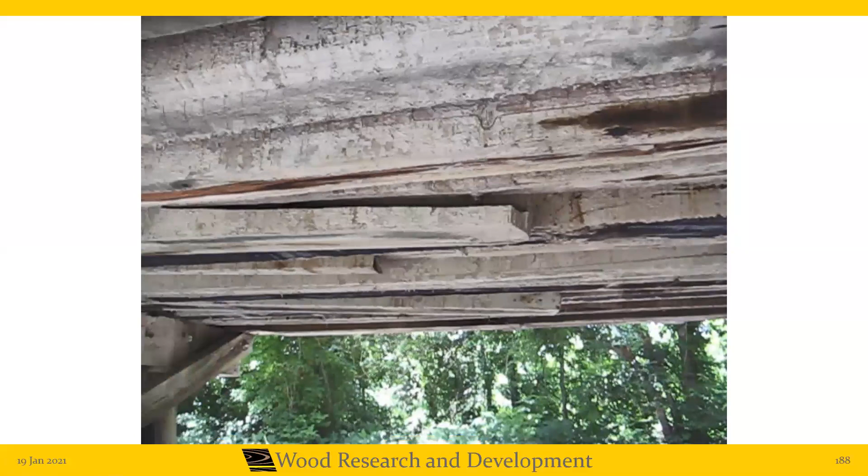Here's another one here - you can tell this is a freight train on a slow order. Now, can you imagine if this was concrete and it had every girder, 11 out of 13, broken? Would I be underneath that bridge if it was precast concrete with these defects in it? No one would be underneath this bridge. No one. Yet we say timber doesn't work, we say timber doesn't carry the load. And when they screw it over by not putting a proper slope cut on a notch and notching too heavily, I can still be underneath that bridge. Would concrete do that? No. So when we talk about concrete being so much better than wood, you need to know your facts.

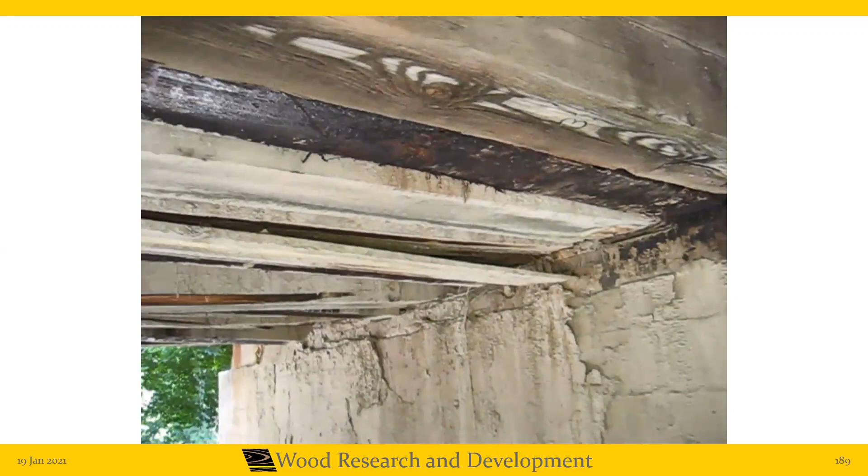Look at this one. Look at the condition of those girders, all caused by man-made defects - had nothing to do with timber. Nothing to do with timber. It had to do with the people installing and cutting notches in the piece. And look how short some of those notches are and still have the problem. I pray that every one of you guys online today will never allow another notch on a girder without some sort of slope cut.

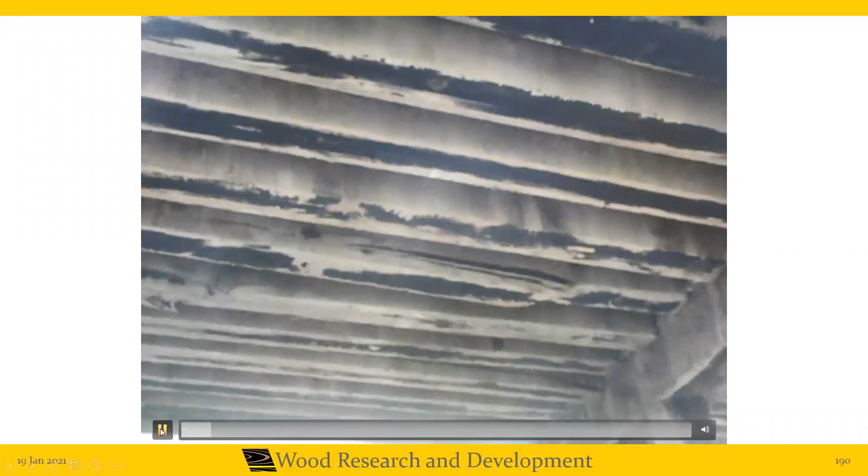Look at this one here, I'm going to go to this one. This is a high-speed rail, this is passenger. Look at this - it's still carrying the load. So this is what happens: they go right to failure from a reentrant corner crack. Look at them, they go right to failure. Because of what? They didn't do this. And why did this matter? Because it made a gradual change in stiffness, reducing the tension perpendicular to grain, which is wood's weakest direction. Slope cut your notches and don't make heavy notches.

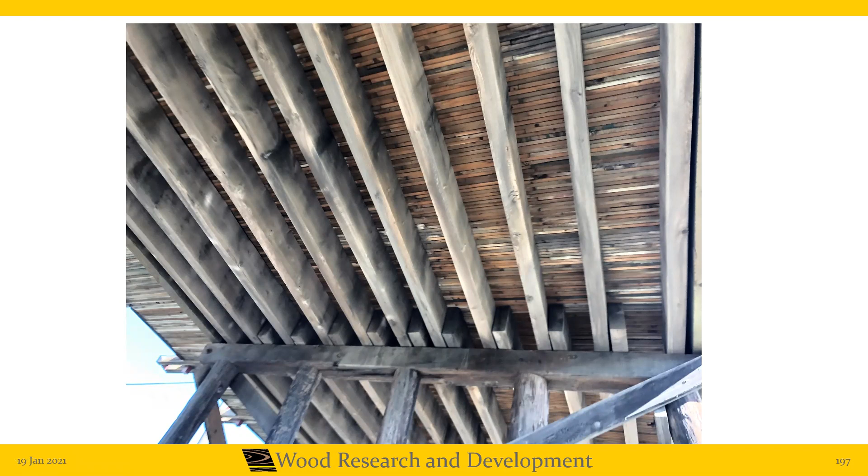Here's one up close - look at it. They're rolling. Why? Because they shrink. Why? Because they make them out of CCA treated wood. Why? I don't know - don't do it. That's why wood gets a bad name. This is a plank deck here on a transverse series of sleepers.

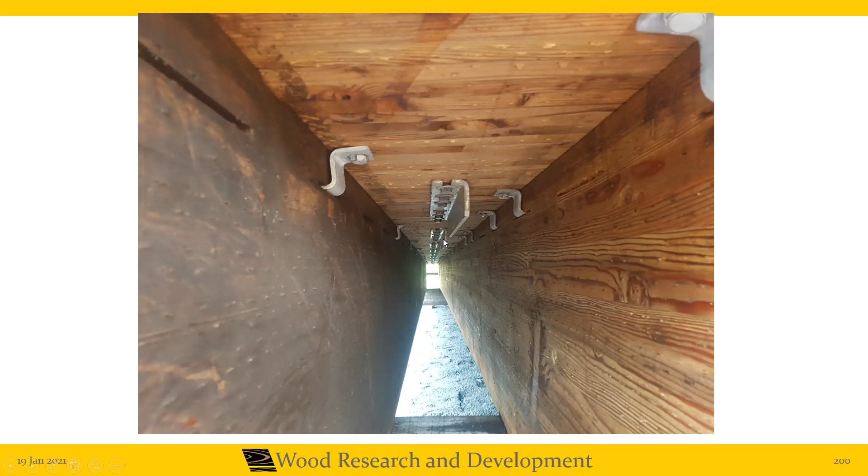And this is a glulam transverse deck, dry, treated, oil-based post. You can see all these gauge beams have a slot for shrinkage and expansion, and they cover differential movement from the tire loads between deck panels. Leads to sometimes reflective cracking a little bit, but what bridge doesn't have joints in it, even if it's concrete?

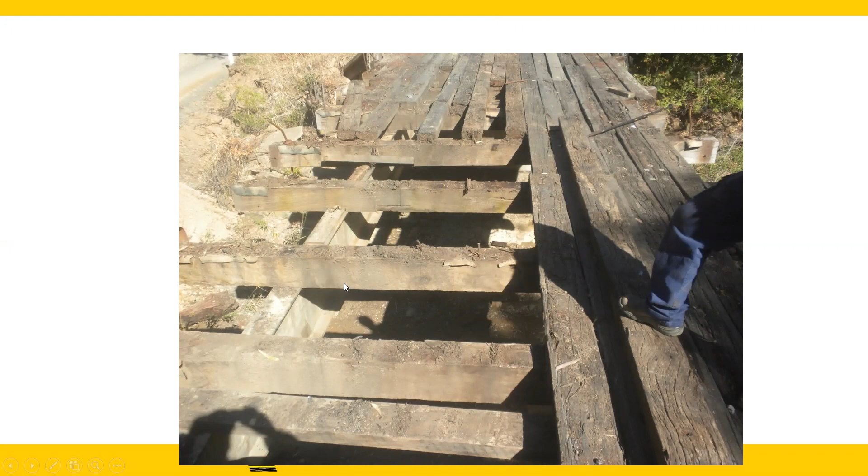This little bridge here is one I like. It's built in Sun Peaks up in BC. It's an L100 bridge that was built in the shop beforehand. Everything pre-assembled, shear panels for increased shear capacity, built up ends for bearing, had a transverse deck with a secondary longitudinal deck on it, treated with penta, post all machining.

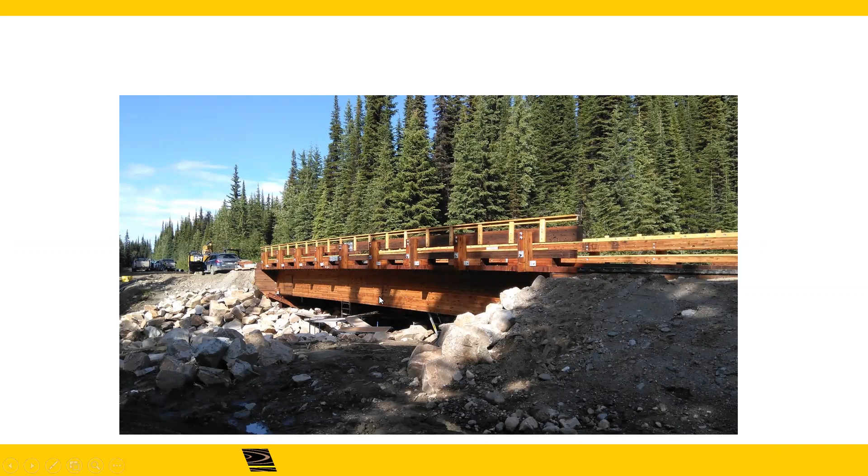When it went to site, not one drilled hole was made. In addition to that, we didn't need driven piles, we didn't need a cast in place of concrete. We used bearing footings. We can use bearing footings on 50 kPa soil if we have to. Compact, drop these fellas in place, put them into place, backfill, and the first thing you know, you can have a bridge in place in a matter of days.

The truck can run on right away. You're not waiting 28 days to see concrete cured. You're seeing wood go into place and be used immediately. You can see here the running deck on the thing, the longitudinal secondary deck for replacement under damage, easy replacement, so you have maintenance.

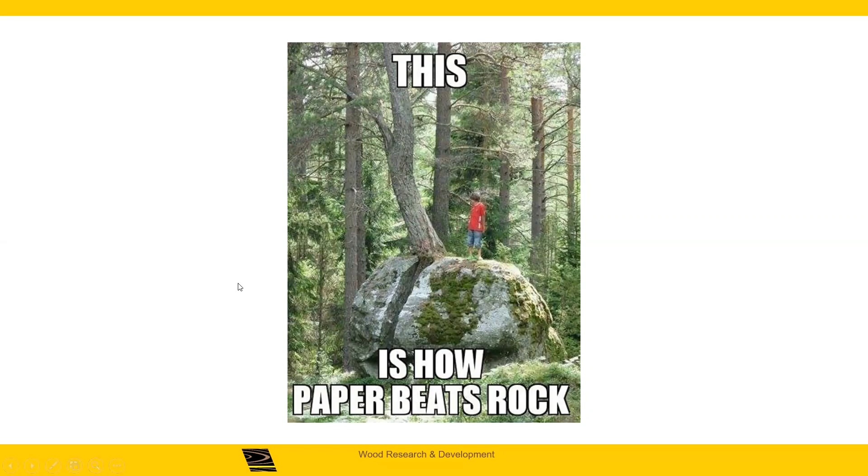Now, this is the end of today's seminar, but next week I want to encourage you to watch because I'm going to show you how paper beats rock and scissors. This is the tree growing inside a boulder, and we're going to talk about that as we talk about how to maintain bridges and maintain them longer and at lower cost.